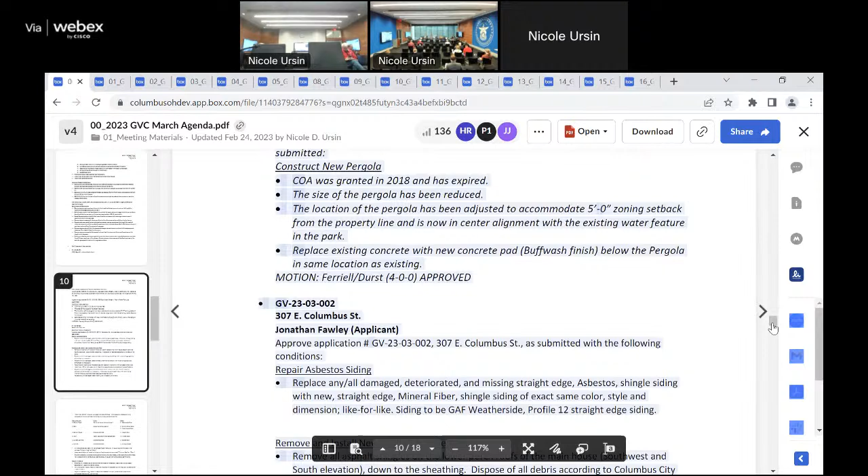Approval of the minutes from the last meeting. Do I have a motion? I move we approve the minutes from the last meeting. Thank you. Second, thank you. All those in favor say aye. Aye. All those opposed? Motion carries. Thank you.

On to applications for certificates of appropriateness. First one is item GV 2303-10, 46 East Frankfort Street. Do we have anyone for this application? Please step forward. Have a seat, thank you.

Please. I have to swear you in. Do you swear to tell the truth, the whole truth, and nothing but the truth? I do. State your name, please. Scott Doran. Thank you, sir.

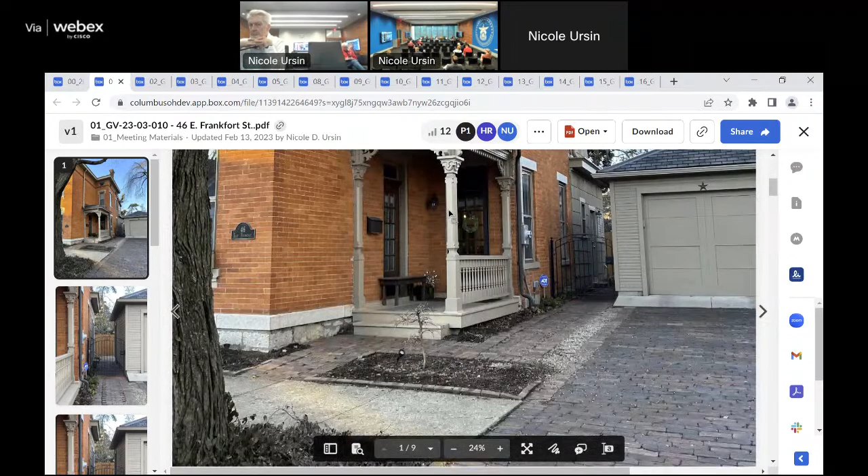This is for an exterior building alteration to install a new side door, to remove an existing full light door on the east elevation, and to install a new metal full light door, a Provia Legacy single entry door with a frame saver frame. The frame is a textured clay aluminum frame cladding. Exterior color will be sandstone, identified as number PMK 21633U in the color swatch, and the hardware is to be an antique brass finish.

Staff analysis: the applicant submitted a COA application for the proposed door replacement. The proposed replacement door is on an addition that was enclosed sometime after 1951, as it appears as an open porch in the 1951 Sanborn maps. After reviewing the file for 46 East Frankfort Street, staff found evidence that the door proposed for replacement was not the original door on the property.

Photos show a panel door on the opening sometime around 1989, where one photo is prior to the paint being removed from the masonry, and another photo is after the paint has been removed from the masonry in 1989. This existing door on the property was installed without a COA by a previous owner.

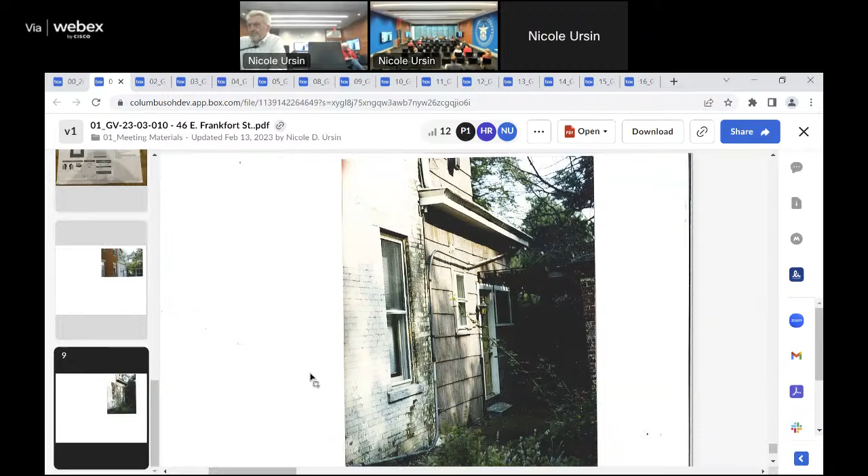Thank you. Do you have anything to add? No, I didn't know it had previously been painted, so that's a new one on me, but no, we're just trying to replace it with a consistent door. It's very dark back there, doesn't get much light in that little alleyway, and the door frame in there is essentially rotting away, so we needed to replace it with something consistent with what we had. Thank you, sir.

Comments from the commissioners? Any questions? Do I have a motion? Mr. Chairman, number 1, GV-23-03-010, 46 East Frankfort Street, to approve the application as submitted. Second. Thank you. All those in favor? Aye. Those opposed? Motion carries. Do you have a certificate, sir? I appreciate it.

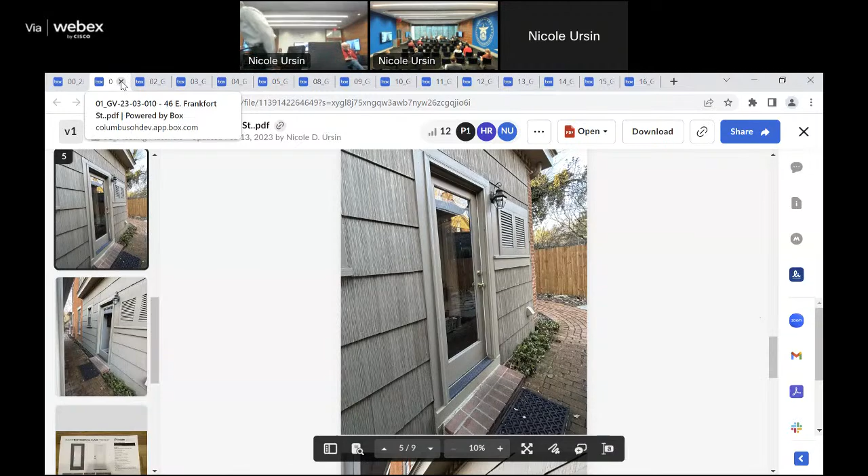Item number 2, GV 2303-11, 143 East Whittier Street.

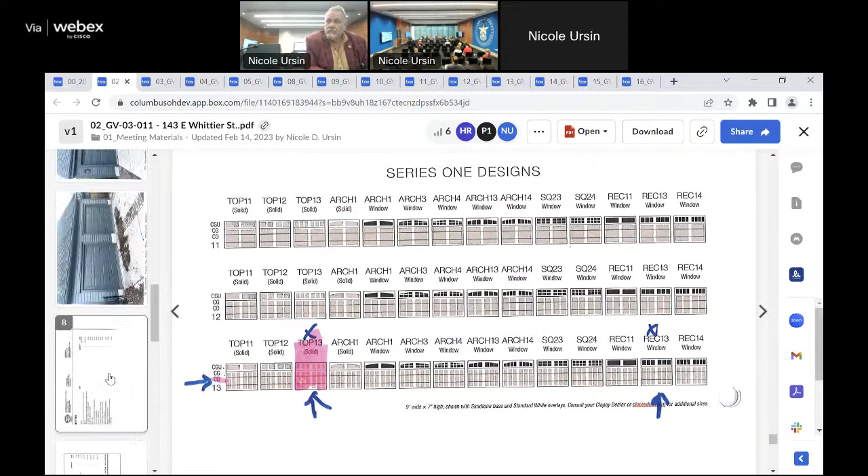The staff analysis is the applicant applied to replace the garage doors after the garage door was broken into as a result of vandalism. The existing garage is historic as the garage appears on the 1951 Sanborn map of the same location. There are COAs issued for new carriage house designs, however the existing garage and those COAs appears to be the same garage existing on the property today, so it appears to be that garage that appeared previously.

The Clopay Coachman door is currently installed at 577 Cedar Alley and 710, 714 South Fifth Street. Staff recommends approval with any and all clarification to be submitted to HPO staff for review and approval prior to issuance of a certificate. The recommended condition here is that the applicant submit the paint color to HPO staff prior to the issue of the COA. The basis for our recommendation is 311611, 9, and 10.

And for German Village guidelines, new buildings, garages, number 6. Do you have anything to add or any comments? No, just trying to get my garage door fixed from being broken into numerous times.

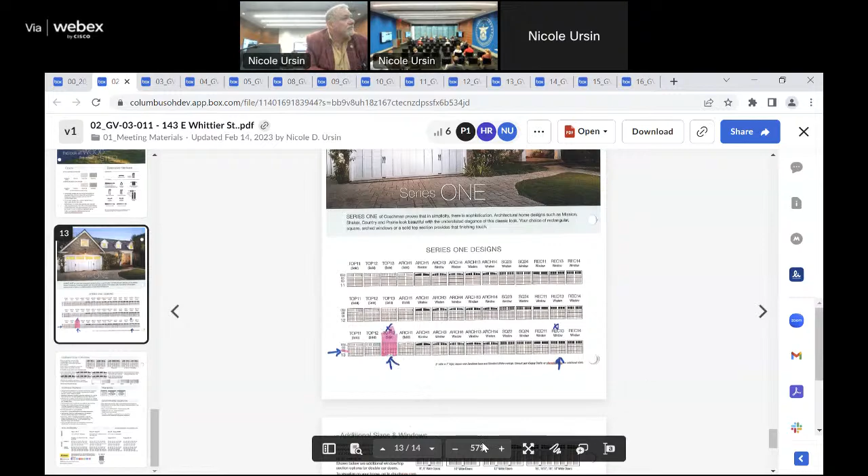Commissioners, just for clarification, did you say the garage is historic or is this a replacement garage? It's a little unclear from the record. The garage door, the garage is what shows up as the existing garage in those COAs, but there have been several COAs issued for new garages since then. So it's unclear if this is a new garage from the COA record alone.

What is the oldest record you've got for the garage? The oldest record is just from the Sanborn map in 1951 with the garage taking the same footprint as the existing garage. But the COAs date kind of a range in the 70s and 80s.

Any other comments from the commission? So in the staff report, it suggests it's a carriage house, is that right? Or is it just a garage? There were COAs issued for the carriage houses. Okay, they were never constructed. So, okay, I just want to say, if this is a carriage house, it's an appropriate one. But it's not, so I won't say that.

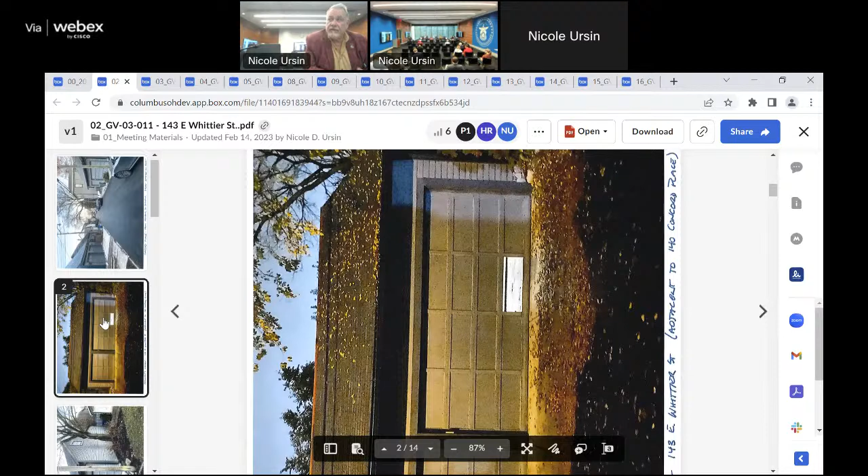It's a 3-car garage, and it's been that way since I've owned it. They did initially select a garage door that matched the others in the alley, but I was suggested that I go with a different model. So I've done that. The cost just doubled, went from $5,000 to almost $11,000 now.

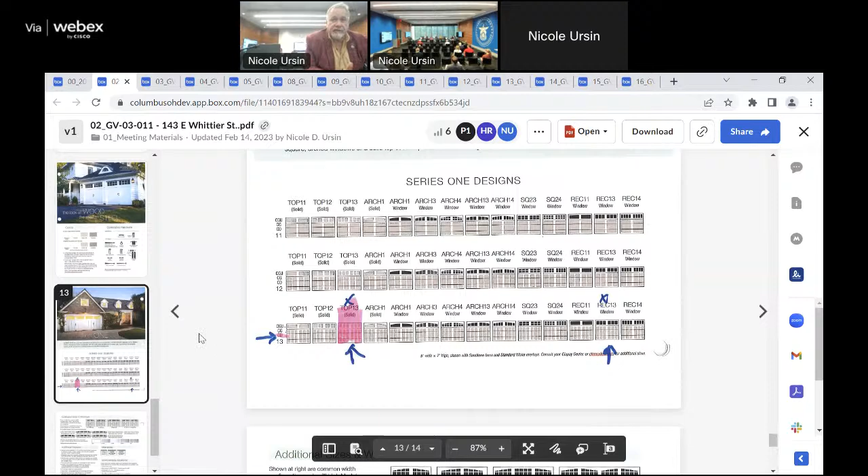Cost of steel, sorry, the cost of steel, is this steel? No, they were both steel doors. I think it was the finish. The one that was recommended has a veneer finish on it. Possible, yeah.

Any other comments from the commission? Do you have a motion? So, Mr. Chairman, agenda item 2, GV-03-011, 143 East Whittier Street. I move to approve the application as submitted. Do I have a second? Second. All those in favor? Aye. Those opposed? Motion carries. Thank you.

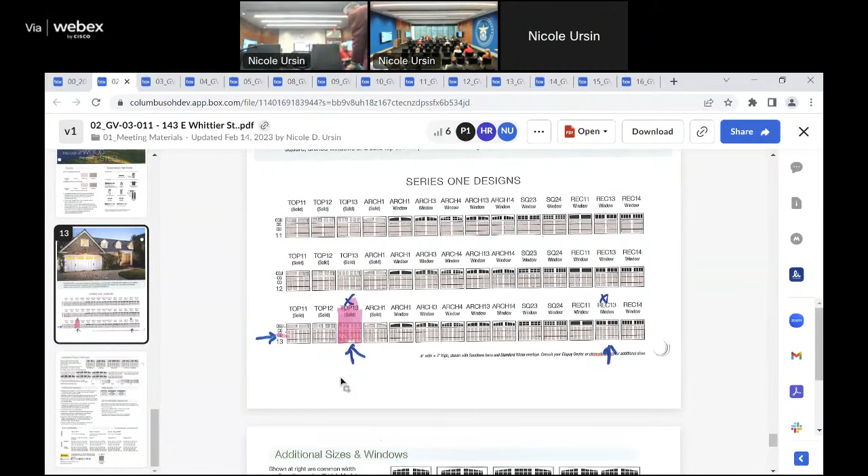Item number 3, GV 23-03-12, 600 South Lazelle Street.

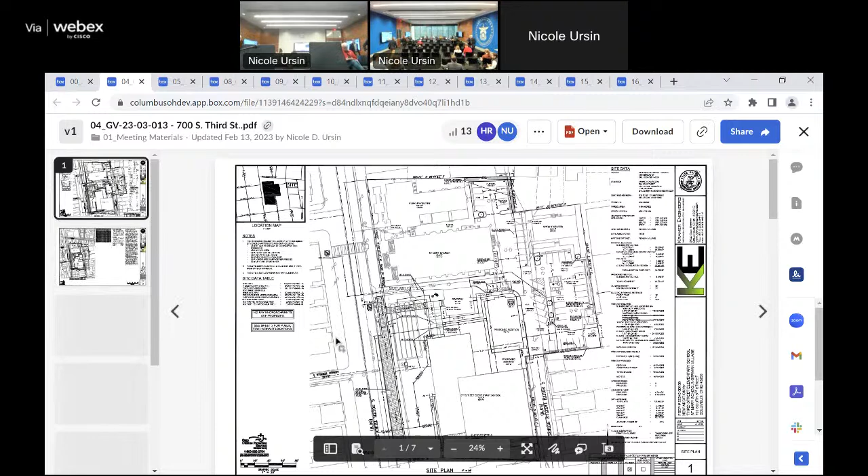Excuse myself. Only who's paying to do this project.

Raise your right hands, please. Do you swear to tell the truth, the whole truth, and nothing but the truth? I swear. State your names, please. Kevin Lee, Matthew Teisman with MKC Architects. Thank you, sir.

The proposed work description is for a revised parking layout to amend a submitted parking layout. The new layout has been reviewed and approved by the City of Columbus and variance BCA 22-134 and meets the variances presented by the commission in GV 22-05-024, which the commission recommended. It also includes the required bike racks per Columbus zoning code 3312.49.

Staff analysis: at the March Business Meeting, the Commission asked the applicant to clarify if there was a change in the number of parking spaces. The staff recommendation is approval with any and all clarifications to be submitted to HPO staff for review and approval prior to issuance of certificate, based on 3116.13 standards for site improvements A.

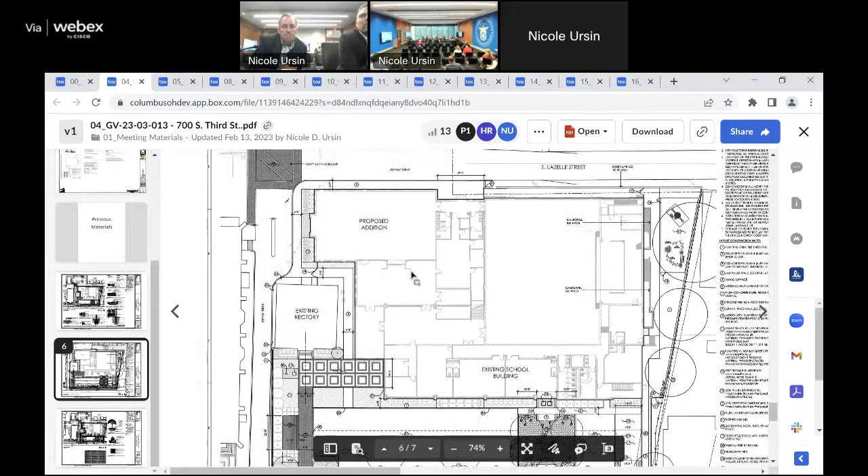So was there a change in the number of parking spaces? We heard confirmation verbally, but we didn't receive anything confirming that in writing. We sent a revised drawing indicating there are no changes to the amount of parking spaces - there has not been a change since the concept review last year.

Anything else you'd like to add or comment on? No. Commissioners? Move on application GV 23-03-013, 700 South Third Street, to approve the application as submitted since the applicant clarified there was no change to the number of parking spaces. Do I have a second? Second. All those in favor? Aye. Aye. Those opposed? Motion carries.

Thank you. Item number 5, GV 2303-014, 637 South Third Street.

With your right hand, do you promise, do you swear to tell the truth, the whole truth, and nothing but the truth? I do. State your name, please. Jonathan Barnes. Thank you, sir.

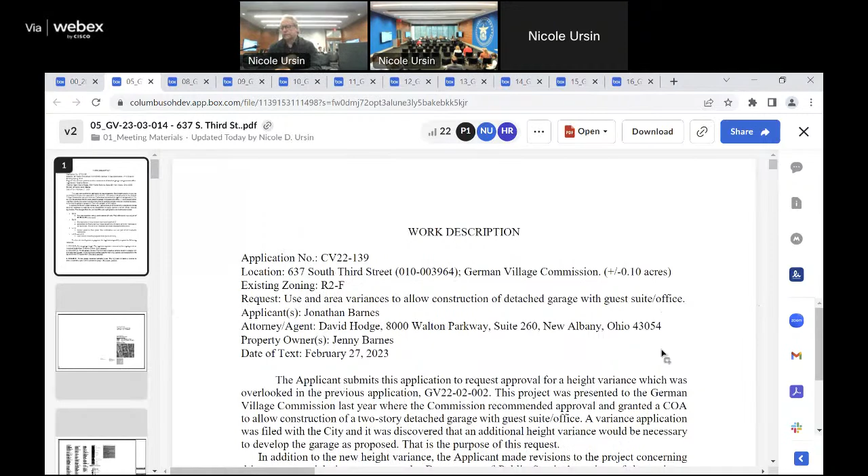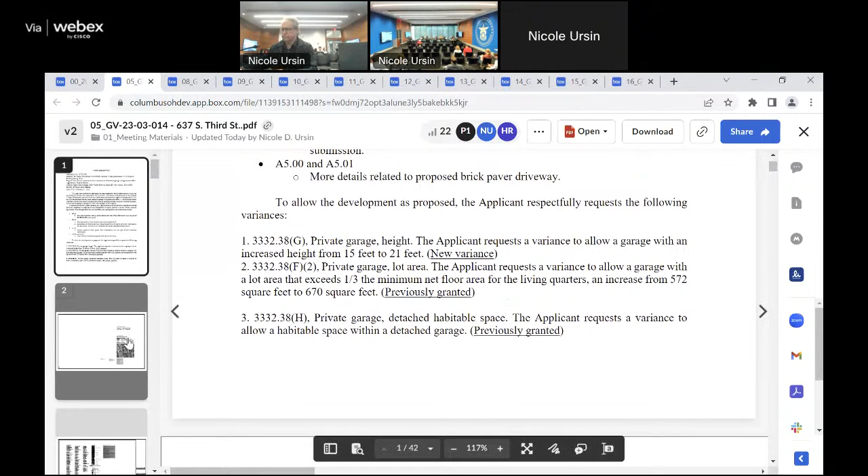This is a proposed work description for variance recommendations: 3332.38F2 for private garage lot area. The applicant requested a variance to allow a garage with a lot area that exceeds 1/3 the minimum net floor area for the living quarters, increasing from 572 square feet to 670 square feet. Also 3332.38G, private garage height - the applicant requested a variance to allow a garage with increased height from 15 feet to 21 feet.

And 3332.38H, private garage detached habitable space - the applicant requested a variance to allow a habitable space with a detached garage. This also includes a driveway material change, where the driveway design now is to be a brick paver driveway mortared on a 4-inch concrete mud slab on 4-inch gravel. The approved design was originally for a gravel drive.

Staff analysis: the applicant submitted a COA application for changed variances from their previously approved variances for a carriage house construction. The carriage house was approved as GV 21020009A and renewed as GV 22020001 on December 14th, 2021, to construct a new detached 686 square foot 2-car garage with occupied studio office space above, replacing their previously demolished outbuilding.

The variance recommended is GV 21020009B and renewed as GV 22020002 on December 15th, 2021. The following is the recommended variances from those - these are coming from those recommendations.

That's the variance recommendation for section 3332.38, which limits private garage heights to 15 feet, requesting a variance to allow height to be 17.5 feet above grade. And section 3332.38H, which will allow habitable space above the garage with reduced development standards in an R2F residential district.

The applicant currently proposes changes to the requested variance recommendations. These changes include adding 333238F2 private garage and lot area change, changing the height from 17.5 to 21 feet, and the height of the carriage house was approved as 21 feet 6 inches. The applicant also proposes a new driveway design, where the design will now be brick paver driveway rather than the approved gravel driveway.

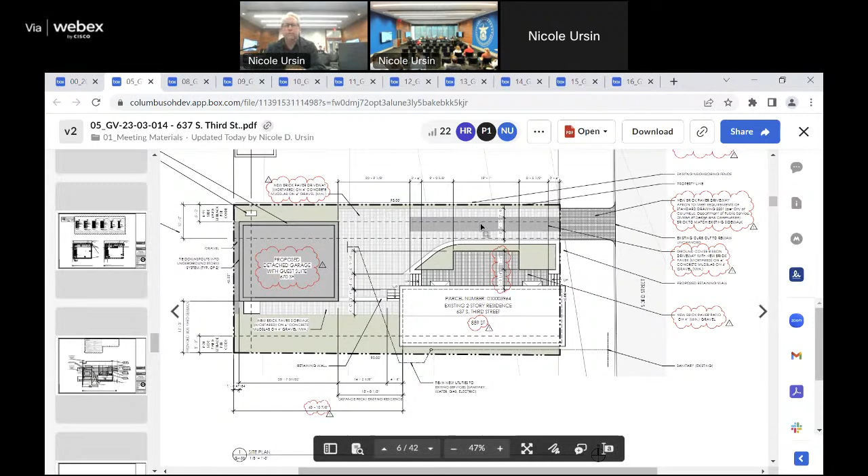Other than that, it's the same. So the pattern on the driveway through the sidewalk, is that a different pattern than the sidewalk, or is the sidewalk pattern contiguous? It's too small for me to tell, but the sidewalk's just a running bond, I'm assuming. I just want to make sure the driveway isn't a change in pattern to accentuate it. No, whatever happens on the sidewalk, we'd want to keep. Yeah, okay, that's what my concern was. Agreed. Anything else? No, that's it.

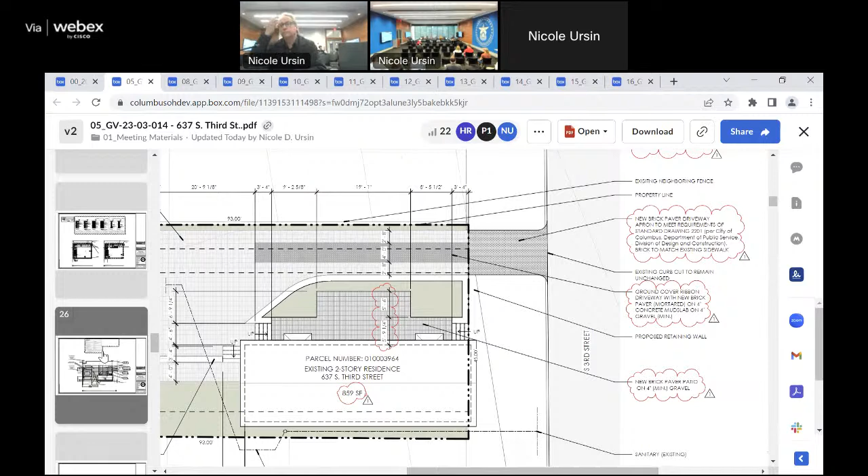Commissioners? I move on application GV 23 03 014, 637 South Third Street, to approve the application as submitted with the clarification that the only change is the driveway material change, where there is now brick on concrete on gravel and a grass divider, making it pervious. And the clarification that whatever pattern the sidewalk brick is will be matched with the driveway brick pattern, since the wording was unclear. We're recommending that the variance be granted, and that these variances just didn't get requested during design, they're just being requested now.

Do I have a second? Before that, so sorry, one part of the motion is for the variance recommendation, and the other portion is for the driveway material change. I don't know if we would like to split that, to have one just be for the variances specifically, and another for the material change. I think we can do it together, to recommend the variance and approve the driveway material change.

So I assume your motion stands that way? That's what my motion stands as. Second, that's what was intended. Sorry for interrupting. No, we're fine, thank you. All those in favor say aye. Aye. Those opposed? Your motion passes. Thank you very much. Thanks.

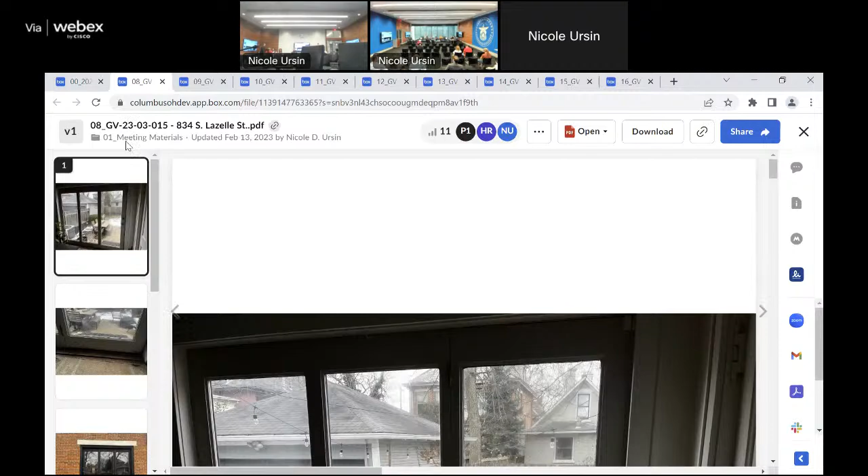On to item number 9, we'll come back to that. GV 2303-016, 792 South Third Street.

Raise your right hand, please. Do you swear to tell the truth, the whole truth, and nothing but the truth? I do. State your name, please. Douglas Brimble. Thank you, sir.

The proposed work description is new construction for a new addition, to build an addition in the rear of the home on the east elevation. The addition will be approximately 7 feet 10 inches by 15 feet 9 inches.

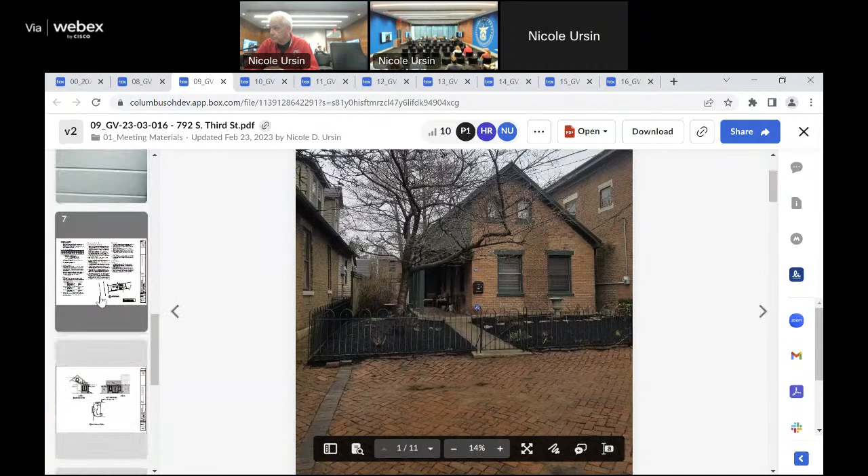Sorry, my staff report is misprinted. It's actually going to be 7 feet 4 inches by 15 feet 2 inches. The agenda has the correct measurements there.

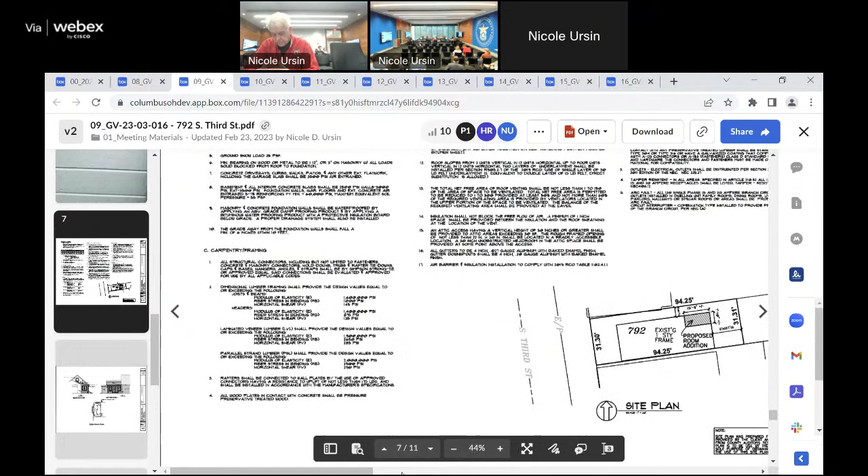Exterior paint will match the existing hunter green. All materials to match the existing addition. Doors to be multi-light Pella 2668 wood French doors. The existing windows to remain on the existing addition. Existing sliding door to be removed. Materials to be Pella Proline casement windows. Shingles will be CertainTeed Carriage House and Stone Gate Gray. The siding will be actual wood, tongue and groove, to match the existing on the wall.

Staff analysis: the applicant was present at the March business meeting and had a brief discussion with the commission on setting back the addition from the edge of the historic structure. The commission requested photos of the building and additions from further away and of the front of the house, and recommended the applicant select a window from the approved list.

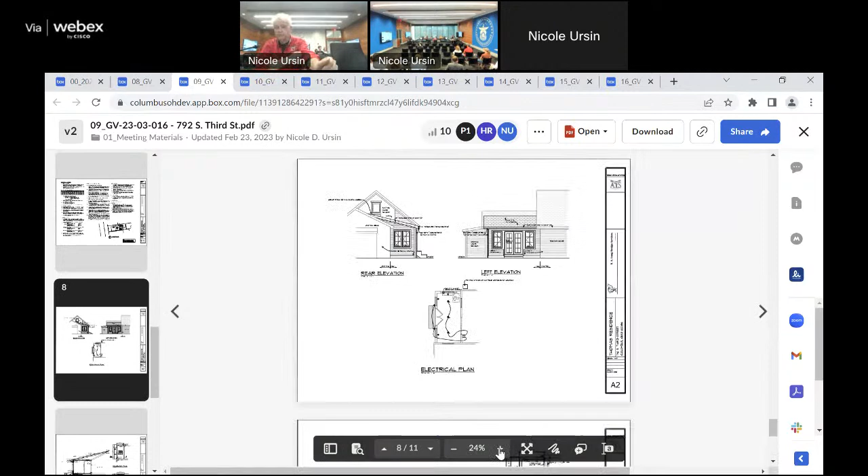The applicant has amended the design to show the addition offset from both corners by approximately 4 inches, and provided photos of the house and additions. The applicant also provided details of the materials intended: Pella Proline casement windows, CertainTeed Carriage House Stone Gate Gray shingles, and wood tongue and groove siding to match the existing home. Staff recommends the commission offer feedback and continue the application to allow time to amend the design so the addition is differentiated from the historic structure and historic additions.

The basis for the staff recommendation is code sections 3116.11, 1, 4, 9, and 10, and German Village guidelines for additions 1, 2, 3, 4, and 5.

The drawings were changed and I did send them in. Yes, they're in the packet. The applicant has amended the design to show the addition offset; that should be in the packet now.

Anything else you'd like to add or comment on? We do additions all the time, and our company philosophy is to make it appropriate for the neighborhood, to make it look like it grew there, that it belongs there. I've got several friends who live in German Village, and they're always on me every time we work in there, so I've got to make it right or I catch it.

Commissioners, is the only recommendation to make the new siding differentiated from the historic siding? Yes. It still shows matching siding - it was on the original, and it's still in the new packet: siding to match.

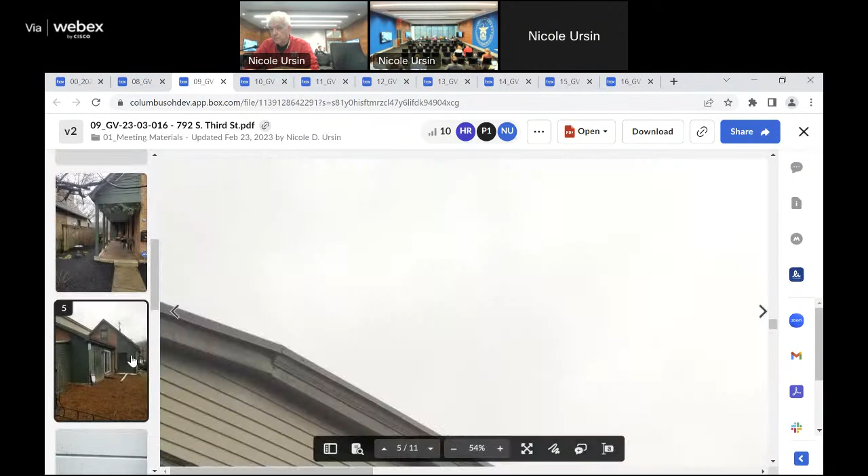Is that too big of a change to amend here? I don't think so, if he's willing to. The question is, you're matching the existing siding - your siding on the addition matches the siding on the historic structure? Yes, it's 6-inch tongue and groove, that's what's on the building. And the request is that it be differentiated, different from what's on the existing historic structure. Oh, you want it different? That's the request. We can do that.

What type of material would you prefer? The guidelines indicate we want to avoid creating a false sense of history and avoid creating the impression that it's always been this way - that's the reason to differentiate it. We could make it 4-inch tongue and groove. There are innumerable ways to differentiate it, aren't there? Oh yeah, there's a million different materials we could use. What would you prefer? That's what we can do.

What's the material on the upper part of the wall, in the gable end there? Yes, it looks like lap siding. In the gable end of the existing or the new? That's shiplap on the front of the home, on the existing historic house.

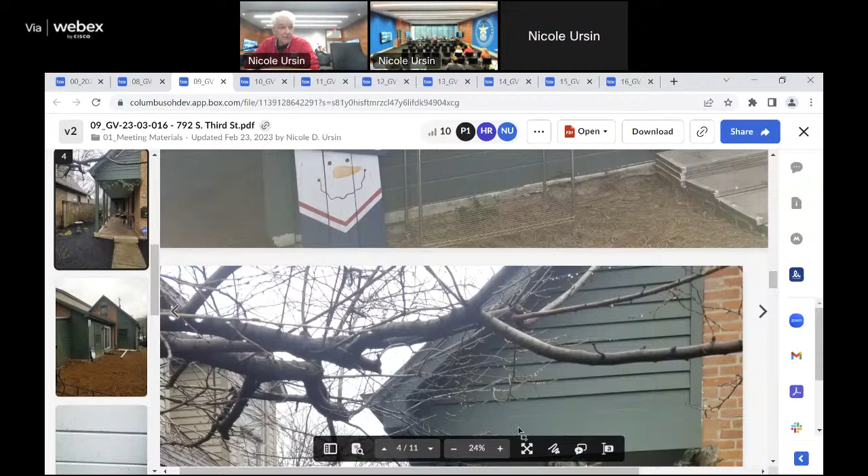Then along the rear, as you'd look at it in the other picture, at the porch and along that side and the rear of the house, it's 6-inch tongue and groove. So it's got clapboard on the side and tongue and groove on the back - yeah, it's got several different finishing materials on it. So 4-inch tongue and groove would be compatible, with all additions being tongue and groove siding.

Too similar? Sort of, I don't know. This enclosure we're covering part of is tongue and groove, and this addition at the back is clapboard. That small structure there is actually a freestanding shed, not attached to the main structure - it was existing when the homeowner moved in.

How is that accessed? To the left, from where the cursor is now. Is there a door on the outside? There's double doors there - no connection to the inside. No, it's a freestanding shed. Commissioners, any thoughts?

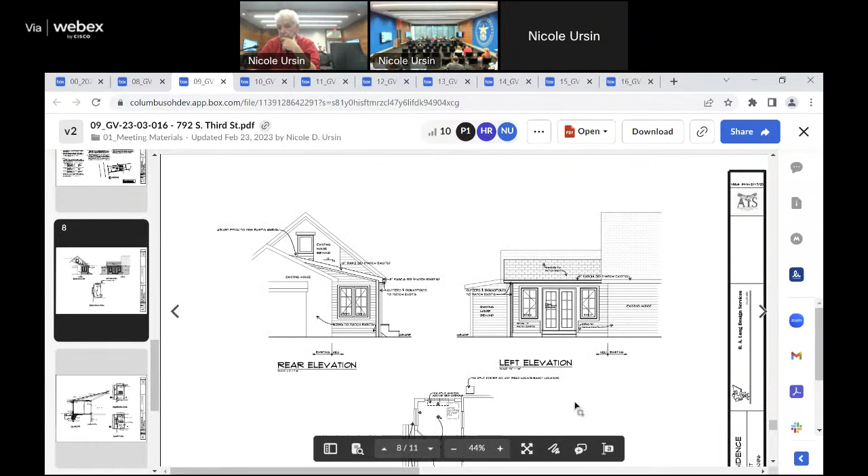Doesn't have nickel gap yet. It doesn't, that's true. Where's the tongue groove? Sufficiently different from what you see down the north side. Well, if it's all painted dark green, you're right over it. It's different, I agree.

I would say make it tongue and groove. So we're suggesting you make it the same material as the new addition on the back, not the clapboard, but the tongue and groove. Is that acceptable? Yeah, just make it a different size. No, I think we're saying the same size. You're covering up, go ahead, covering up with sufficient amount of 6 inch.

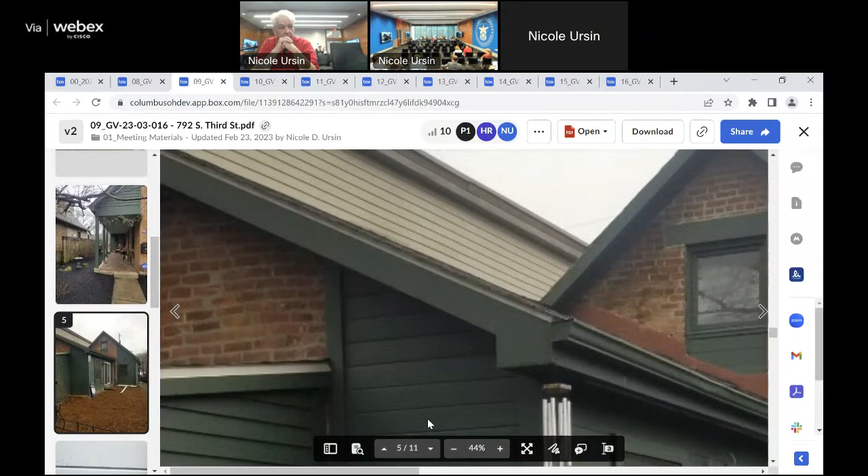If somebody else has got some other thoughts, I'm totally open. Yeah, I was thinking that too, that it's completely covering up. Almost all of it anyway, yeah. That little bit left, I'd say just go ahead with that.

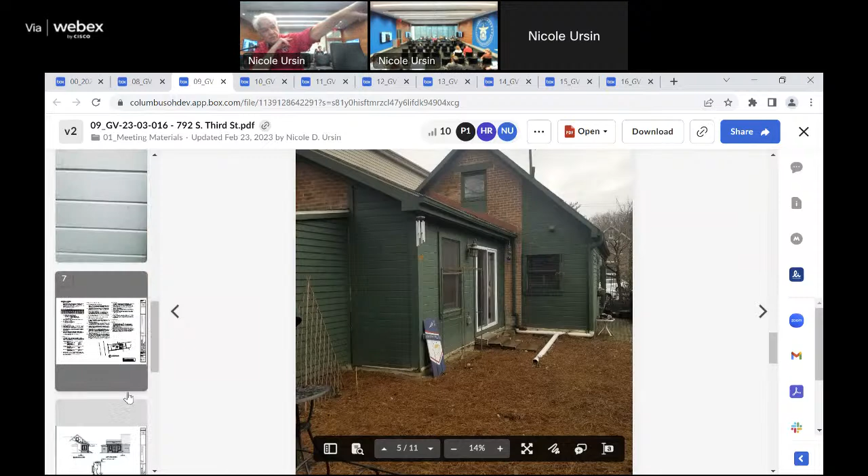And that is an addition, by the way. That part of the building, the historical building, is where the taller wall is. And then back here where the sliding doors are, that's actually an addition that was put on. It's been a while, but it is an addition.

Or just be tongue and groove. I would say either way, once it's painted dark green, no one's gonna see it. Okay. But if the color changes. Okay, is that acceptable to you, sir? Yes. Do I have a motion?

I move on GV 23 03 016, 792 South Third Street, to approve the application as amended by the applicant to change the exterior wall material from a 6-inch tongue and groove that matches the historic siding to a 4-inch tongue and groove siding. Do I have a second? Second. All those in favor? Aye. Those opposed? Motion carries.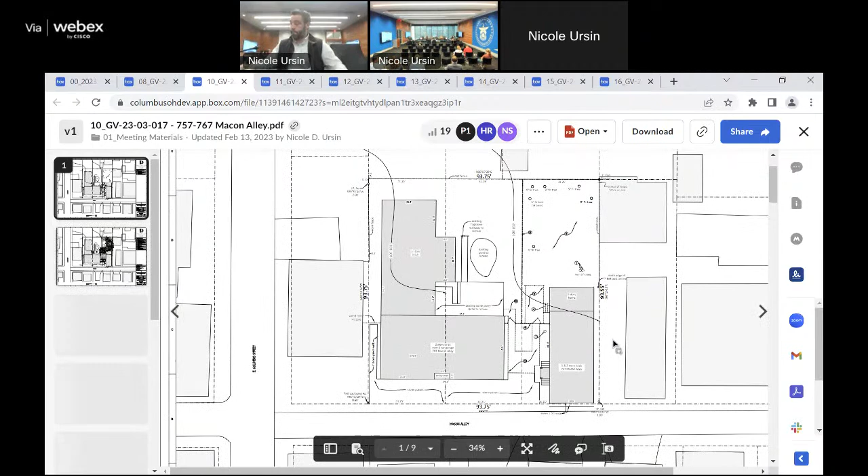The proposed work description is hardscaping for a pool to install a new in-ground fiberglass pool that's 10 feet 6 inches by 14 feet 6 inches with a 24-inch tall landscape wall with built-in water feature. The pool coping is to be Indiana limestone, and the pool equipment is to have a 5-foot 6-inch tall wood fence and gate to match existing fence that'll be installed on a concrete slab. There's an installation of a 24 kilowatt generator on a concrete slab along the west property line. And there'll be Indiana limestone pavers, ashlar pattern, at pool deck and patio. The landscaping is to plant emerald green arborvitae and occidentalis smaragd as shown along the fence line.

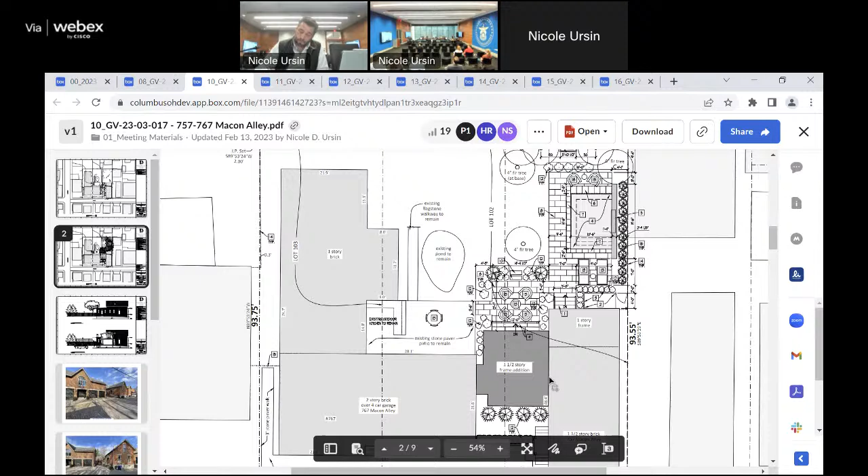Staff analysis: a connector between the two properties was approved in August of 2022 but has not yet been constructed. At the March business meeting, the commission did not have any request for additional information or feedback at that time. Staff recommends approval, with any and all clarifications to be submitted to HPO staff for review and approval prior to issuance of certificate, with the following condition: that product sheets for pavers, plants, or photos of plants and pool be submitted to HPO staff for review. The basis for the staff recommendation is 311611, 1, 9, and 10, 311613, A, and it's somewhat compliant with the German Village guidelines for site lighting, street furniture, pools, fountains, and gazebos, section 6.

Anything to add or comment? I don't think so. I think you covered it, but I'm happy to answer any questions if you guys have any.

My only question or concern is that the generator's in compliance with the city's code restrictions on noise. Yeah, it is, for spacing and for placement. Just bringing it up. But we can confirm that if we want to with staff. Yeah, if you would. Sure, just confirm that it is. That way we can say that we did our due diligence and asked the question. Do whatever I can. Anything else? Do we have a motion?

As far as I can tell, nobody really can see this pool. No, it's fenced in, yeah. I think they want to get it in before the addition's built, but that's my wild guess.

Item number GV 2303-017, 757-767 Macon Alley. I move to approve as submitted. Do I have a second? Second. All those in favor? Aye. All those opposed? Motion carries.

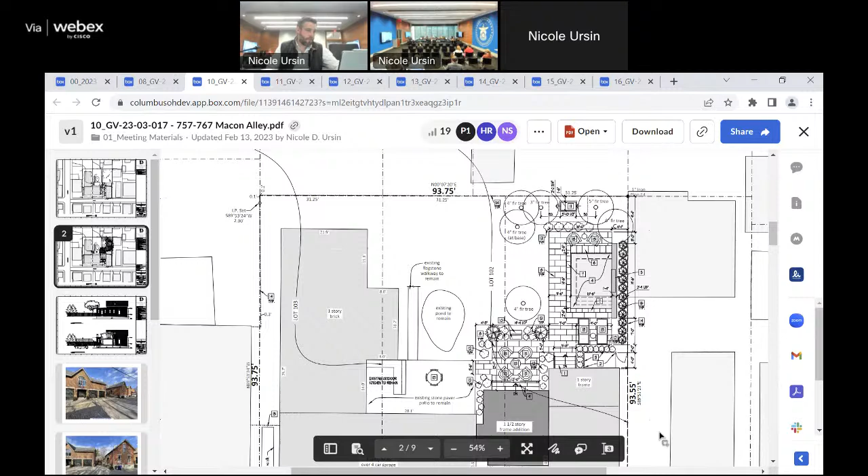The proposed work description is for an exterior building alteration for window replacement, gutter changes, and paint. To remove a kitchen window on the east elevation of an addition, it's a small 2/2 window. Replace the kitchen window with a single 4-light Marvin Ultimate French door. Retain the stone header and opening within the wall. Color to be iron ore.

Also to remove 2 living room windows on the east elevation addition. They are 2 large 2/2 windows, and remove the stone sill and stone lintel. Remove brick below and between windows. And replace those 2 living room windows with double pocketing sliding doors, the doors are to be Marvin Ultimate with grills, and the colors to be iron ore. There's also to install a new lintel and sill and the new door opening to match existing.

Remove aluminum half-round gutters and replace with 6-inch copper half-round gutters and 4-inch copper downspouts. Paint existing windows, sashes, and doors SW 7069 iron ore. Relocate an AC condenser per submitted drawings, with the AC condenser to have a new concrete slab. Remove basement window and window well and fill in the opening with CMU block. And install limestone steps for the new door openings.

For the staff analysis, after the application was received, staff recommended the applicant reconsider the application as to not widen any existing openings per the German Village guidelines. Applicant then emphasized the proposed changes were on a non-historic addition, that they wanted to move forward with their application. The non-historic addition where all of the changes are proposed was issued a COA in 1992.

At the March business meeting, the commission asked the applicant to provide any information on the original date of the home, to provide more context, photos of the overall property, and to ensure the location of the AC condenser was allowable that close to the property line.

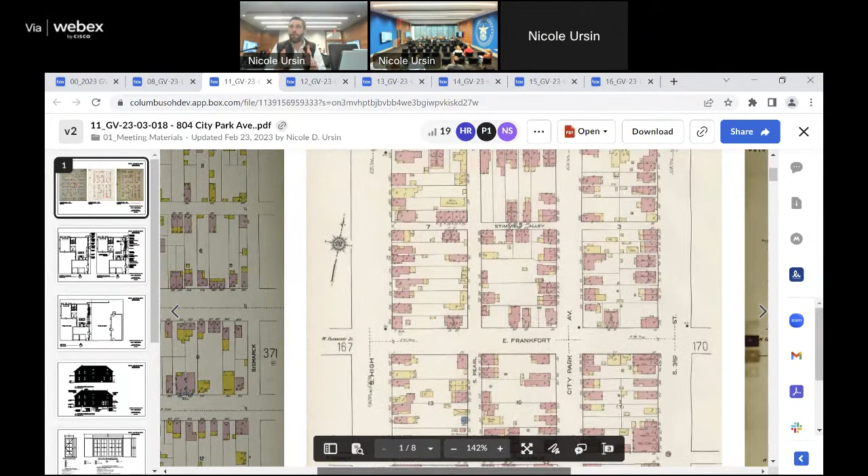Comments or additional information? Yeah, this is somewhat recent past construction from the Sanborn maps. We were able to identify the previous structure on this lot, which was a wood structure that I think went up to 1955. Different location, different shape. Even the front of this structure along City Park has a split block foundation. It was probably done about the same time, although I couldn't find 2 separate applications for that structure.

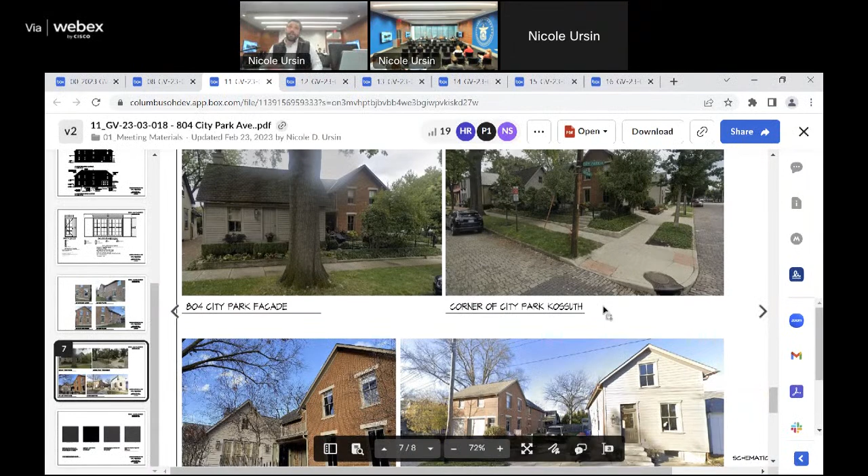And so we tried to update staff with as much history as we could from the Sanborn maps. And we understand the screening and spacing for that condenser, certainly. I think it was there. It's there now. Further on the interior of the site, and we're proposing to move it because of the new opening.

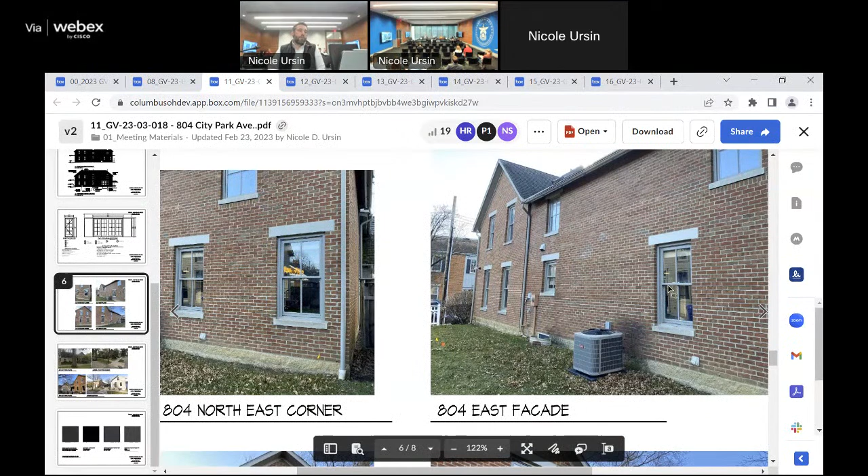I don't know if it was put there without any review. But one thing that we did want to point out was the owner does own both of these parcels. And so the screening, we would certainly want to screen it from Kossuth and Wood. There's a landscape plan coming for that, and it can be perhaps conditional on that landscape plan's approval. But yeah, we're just proposing to make those new openings for the new owner's plan for the property.

Has had good luck with their copper downspouts? Currently not copper, okay, so wants to. My experience with copper downspouts is installing copper downspouts is exactly the same as putting $100 bills on your front porch, they disappear sometimes. Yes, certainly understand that. That was an agenda item at one of our previous meetings. Yeah, I was thinking, oh gosh, maybe this feature of life in German Village has disappeared, but no. Yeah, it was a thoughtful question, though.

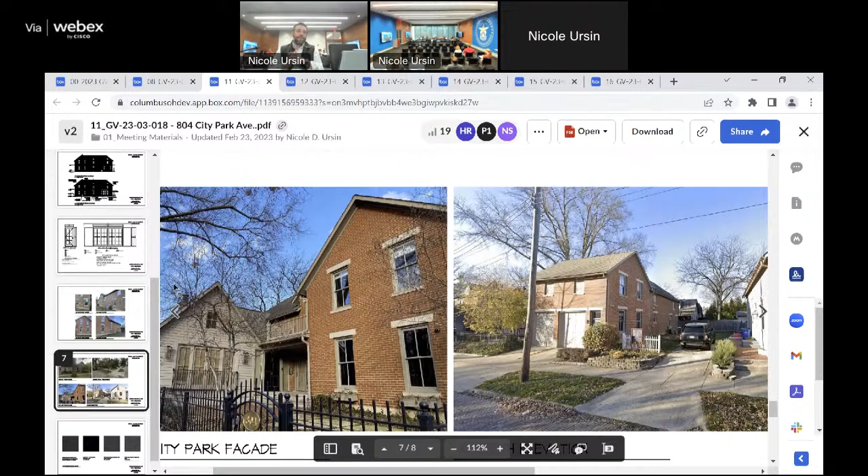Thank you. Sir, is there any potential for putting the condenser on the north side of the property? The furnace itself is just underneath the kitchen. And with the forthcoming landscape plan, that location was preferred from a distance standpoint, with a finished basement in there, and also with the layout that they're working on for the landscape.

So that's where, I guess, an assessment of the yard and where the openings were - that's the preferred location. On the north side, currently, from the information we have, we didn't get an updated survey because there's not really anything happening up there. We're not coming up against the boundary. Since he owns both properties, the dividing line between the two properties wasn't so important to them, north and south. But the driveway on the north side of the neighbor is right up to the house.

So there's some classic overlap happening there. The neighbors probably claimed a little bit of that - not enough room, considering the driveway, for the condenser to sit on this.

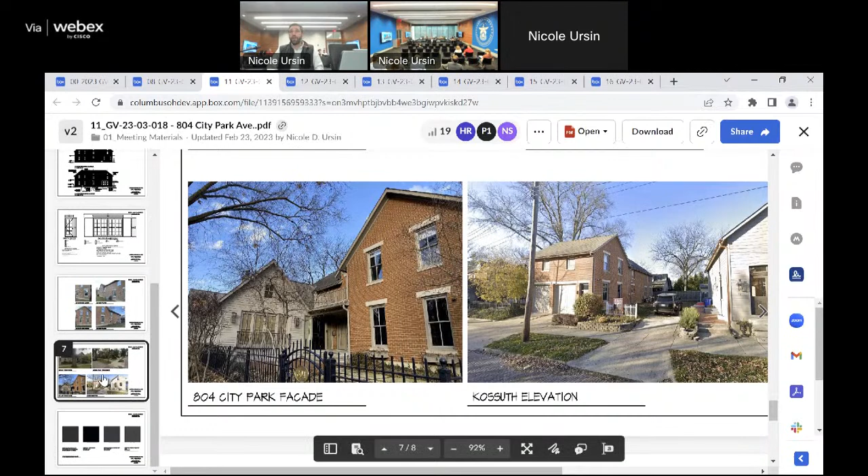I would still rather see it back from the side street as much as possible. If it got relocated north of the two pairs of windows there that are into the garage, if it was located in that next section of wall, which would be to the right on the elevation, in between the new door proposed for the French door to the kitchen and the first window of the garage. I'm just saying even that back corner of the garage, you know what I'm saying? That is back on the garage.

Oh, I see. Yeah, I think it would be the distance for the line set that we need to consider, and the efficiency. My experience would say you'll be fine with the line set.

If not, you just move it right next to the steps to the new door. Trying to avoid that, I get that, but yeah, I just want to see it off the street as far as possible.

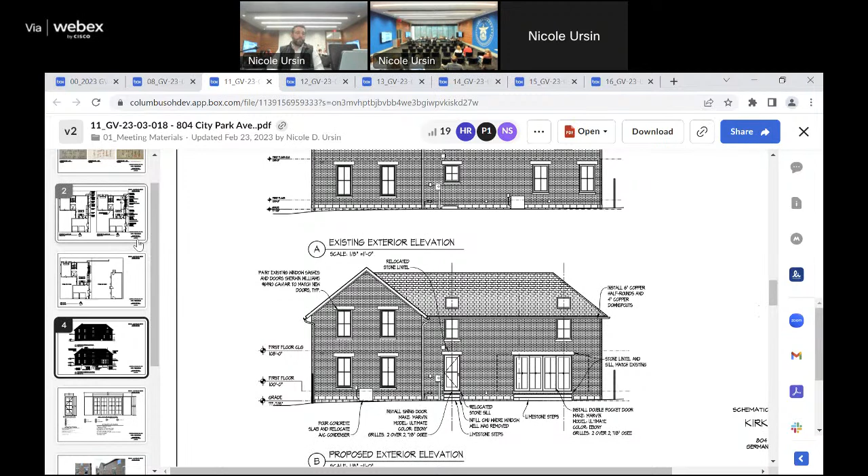Okay, commissioners, anything else? Any other comments? Do I have a motion?

I move on application GV 23-03-018, 804 City Park Avenue, to approve the application as amended by the applicant, that the condenser unit will be moved to the rear corner by the garage, and that the future landscape screening plan that is coming may choose to relocate that condensing unit somewhere else. Do I have a second?

Second. All those in favor? Aye. All those opposed? Motion's carried. Thank you, guys.

Do we have - okay, go ahead. I was going to go back to number 8, but okay, well, sorry. No, that's all right. Now, do we have number 8 here, who is 834 South Lazelle? Very good. We will move on to the next one.

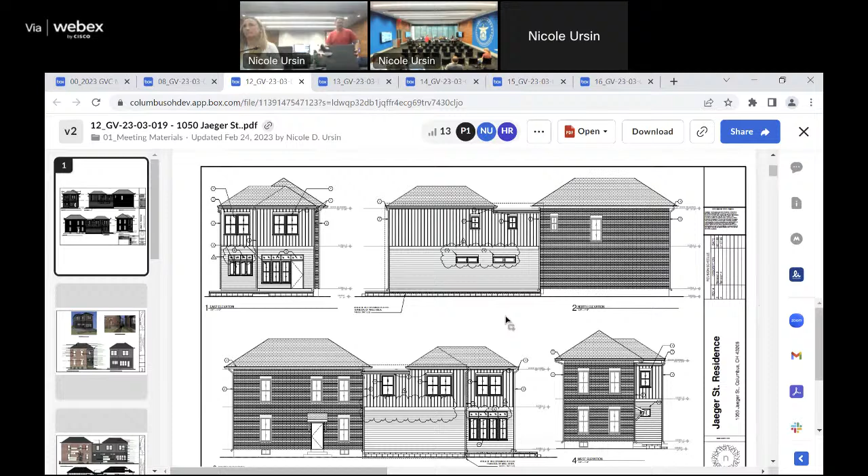Number 12, which is GV 2303-019, 1050 Jaeger Street. Raise your right hand, please. Do you solemnly swear to tell the truth, the whole truth, and nothing but the truth? I do. I do. And state your names, please. Josh Green. Elena Green. Thank you very much.

The staff analysis: staff requested additional information prior to the business meeting, and at the business meeting, the commission asked staff to edit the materials packet to have the previously approved drawings next to the proposed drawings. The applicant has clarified that while there are more details in the newly submitted drawings, the applicant is proposing no additional changes beyond the windows. Staff recommends continuing the application to allow the applicant time to amend the design with fewer changes to the window openings, based on Section 3116.12, standards for new construction, A, D, E, and K.

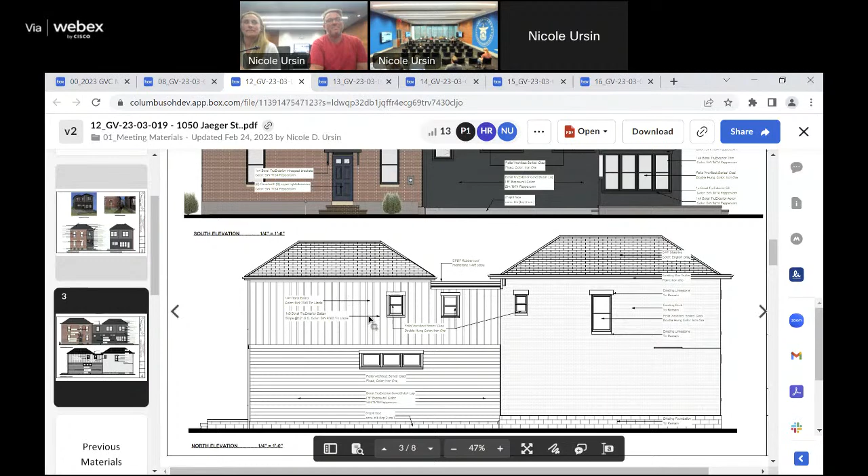So it's just a couple of additions and subtractions, adding the transoms in the new section. We took this project over, and sometimes what applies in the design stage doesn't apply well to the build stage, so some of the windows on the neighborhood side needed to be removed to make room for mechanicals and such.

Just making sure I understand what's going on. Essentially just in that elevation, lower right-hand side, right? Yeah, so originally on that side, where the bubble is, there used to be a single casement window and 2 transom windows. We removed all of that wraparound window section completely.

And then in that view, that 4-panel window gets a transom above it, so everything would line up. This is on the new addition, correct. The street side that faces the park isn't changing at all, and the original structure is not changing at all, just the windows.

Sure, any comments, questions, staff? Did we verify if they were 2/2 or still going to be 1/1? We did clarify that. They're still 1/1. The architect had them as 2/2.

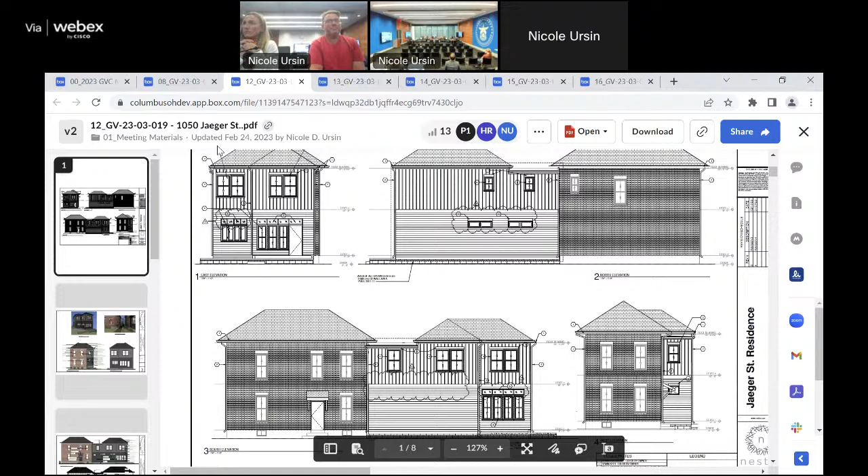Thank you, awesome, thank you, have a good evening. I'll send that as soon as we leave here. So you have it, yeah, thank you. No worries, if I don't do it now I forget. Thank you, have a great night.

We'll wait for our fifth commissioner to seat himself. Oh, I didn't even know. Sorry, I'm late.

Item number 13, GV 2303-020, 275 East Whittier Street. Please raise your right hand. Do you swear to tell the truth, the whole truth, and nothing but the truth? I do. State your name, please. John Stevenson, attorney for the owner. Staff?

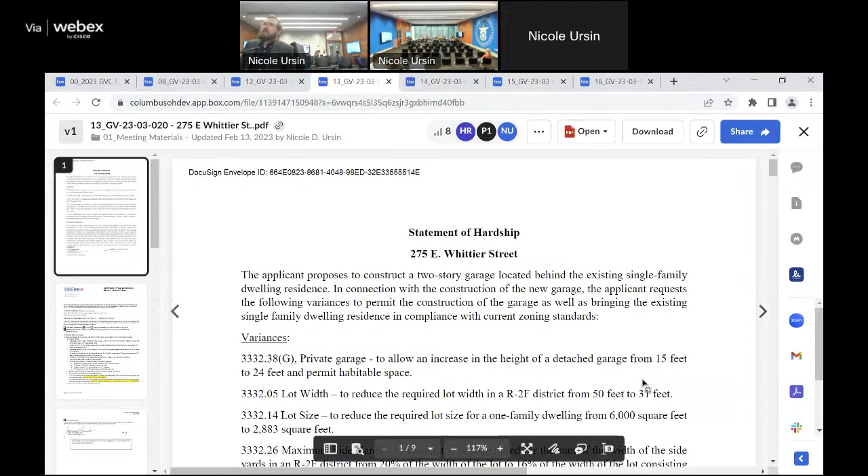The proposed work description is for variance recommendations. The garage design was previously approved in March of 2022 as GV 22-01-006. This is 3332.38G, private garage, to allow an increase in the height of a detached garage from 15 feet to 24 feet and permit habitable space.

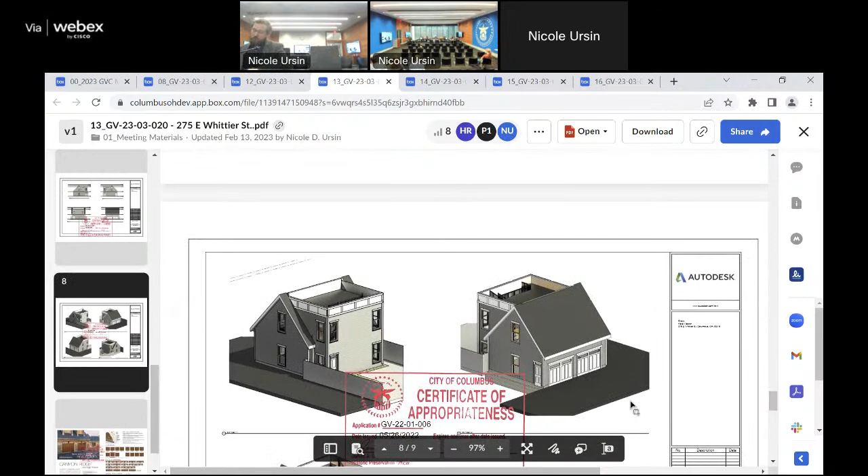3332.05, lot width, to reduce the required lot width in an R2F district from 50 feet to 31 feet. 3332.14, lot size, to reduce the required lot size for one family dwelling from 6,000 square feet to 2,883 square feet.

3332.26, maximum side yards, to reduce the ratio required for the sum of the width of the side yards in an R2F district from 20% of the lot width to 16% of the width of the lot, consisting of a 1 foot 11-inch side yard and a 3 foot 1-inch side yard in connection with the construction of the garage.

3332.26, minimum side yards, to reduce the minimum side yard required for one family dwelling in an R2F district on a lot less than 40 feet wide from 3 feet to 1 foot 11 inches in connection with the construction of the garage. At the March business meeting, the commission asked the applicant to provide which variances are existing and which are caused by the garage, and to clarify if there are any changes to the proposed design. The applicant has clarified that there are no changes to the design.

For 3332.38G, the variance is for new construction. For 3332.05, lot width, this is an existing condition of the lot. For 3332.14, lot size, this is also an existing condition of the lot.

3332.26, maximum side yards. This variance is required for the construction of the garage. However, the existing structure would also require a variance that may be slightly less than the one requested.

And 3332.26, minimum side yards. This variance is required for the construction of the garage. However, the existing structure would also require a variance that might be slightly less than the one requested.

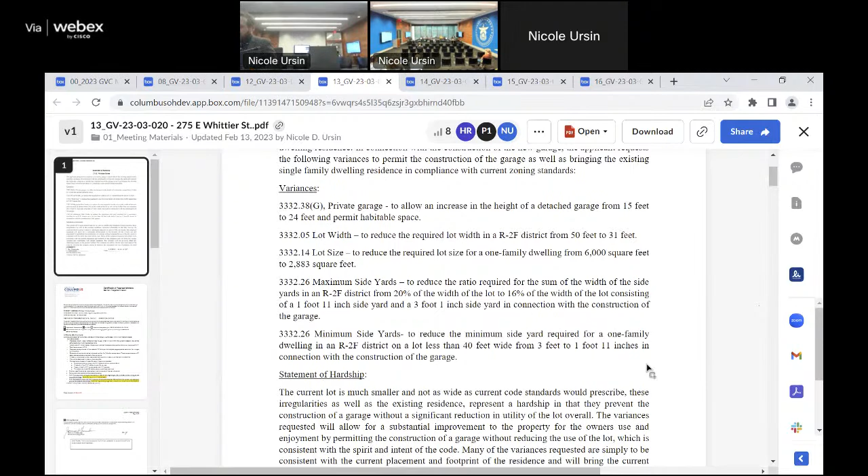Hang on a minute. You remember whether you voted just now? No, I can't remember whether I voted. Yeah, I thought you just voted for the verification. No, because I didn't think I voted for the original design either.

Okay, for sure. At the last, or at the hearing that was approved, we had 4 commissioners at the time. Commissioner Thiell, who recused, and Commissioner Foley McCoy seconded, or who made the motion and seconded the motion. So I cannot recall who was all there at the hearing. I know Anthony was there. And I think Anthony might have been this vote.

Probably, it's possible. Well, you don't have to vote no now because you voted no last time, but that would be the consistent thing to do. But it would help if you remembered. Yeah, and I would have to dig through my files to see.

What it was. We only had 4 at the time, so Commissioner Durst, you may not have been there for that final review. What's the date of that final review? So do we take the vote again?

If we would like, just to. So let's take the vote. So I think, well, did we vote? Was our vote recorded? It was recorded. I said it doesn't... I said it passed, yeah, because I thought, I mean, yeah, there, so could be the continuations as well, possibly.

So someone who voted affirmatively could move to reconsider. Voted in favor of? Well, someone who was in the majority who wished could. So not Karen. Yeah, we weren't in the majority.

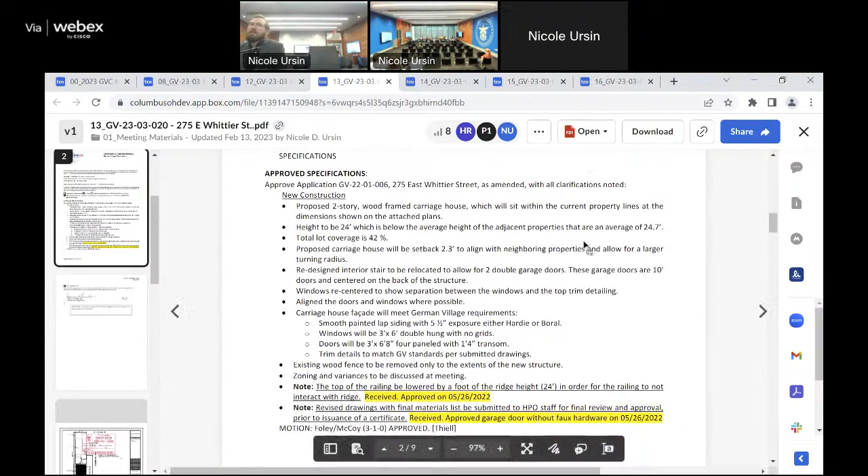Made a lot of concessions, that's why I was asking what was the date of the final vote. So if you had foreseen this eventuality, you might have moved to have us continue it, but... That's right, voted. Yes, yeah. Or ask for more discussion.

But now we've voted, so it doesn't pass. So can we? Well, it's not recommended at the time. Right, not recommended. All we do is recommend. Yeah, so we don't, the city could still say you're good here.

And there's no other option for us to reconsider the vote? Being among those who prevailed, I'm not interested in exploring creative avenues for you to change the results of the vote. There may exist, none occur to me at the moment. And Karen and I can't. You were the... All right, so I move to reconsider.

Does it have to be one of the... maybe, I would imagine not. So do I have a second? I will second. All right, and we have to vote on the motion to reconsider.

All those in favor of reconsidering, say aye. Aye. Opposed? Motion carries to reconsider.

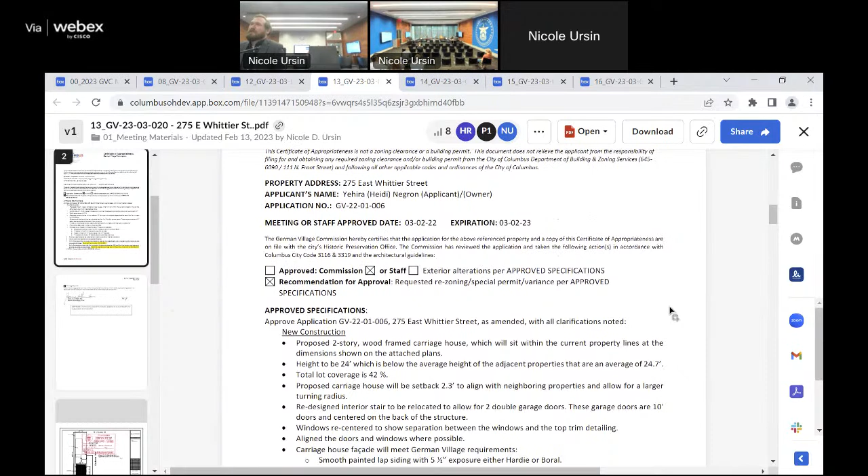That's still your opinion, for sure. My opinion is I disagree with the design wholeheartedly. I think it's a violation of the guidelines, et cetera, but that ship has sailed.

So rather than me taking a stand and voting against the zoning request, I will vote to approve it, to recommend it. So you are truly changing it, yes. I understand your position. My position is that we need to move ahead on this because the design is approved.

So they need to move ahead. As much as I resent it and don't like it, I'm not going to stand in your way. That ship has sailed. Well, I appreciate that from the commissioner, because I think that's a fair thing to do.

So all those in favor of recommending the vote to recommend the zoning, say aye. Make a motion first, right? Sorry, motion to recommend. Is there a second? Second. All those in favor of approving the recommendation, say aye. Aye. Those opposed?

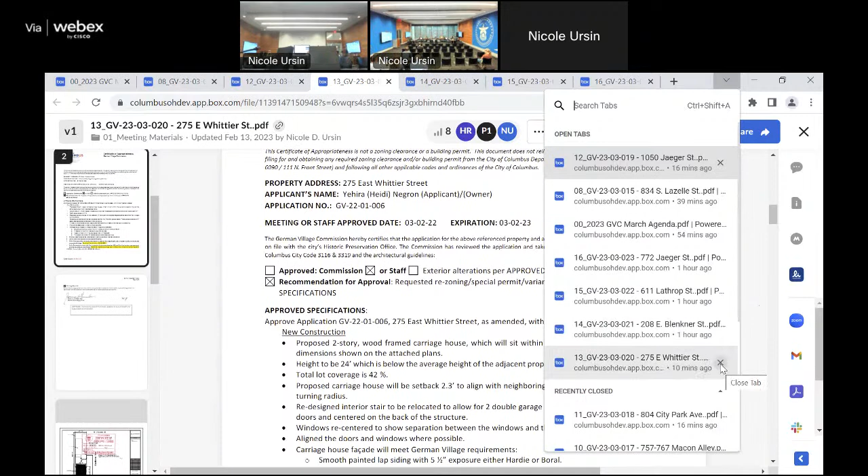It passes. Thank you. Good things every day. I'm unfair? No, well, I didn't say that. No, he said it would be fair to approve it. Oh no, I didn't say that. By implication, well, in my opinion. I understand. It goes without saying, it's a matter of opinion. We're talking about fairness. I don't think you're unfair, I think that's a bad opinion, I see, if I'm correct. I understand. Because I do not understand.

Let's move on. Thank you.

Item 14, 208 East Blenkner Street, GV-23-03-021. Raise your right hands please. Do you swear to tell the truth, the whole truth, and nothing but the truth? I do. State your names please. CJ Andrews, Mode Architects. Joseph Wenger. Thank you.

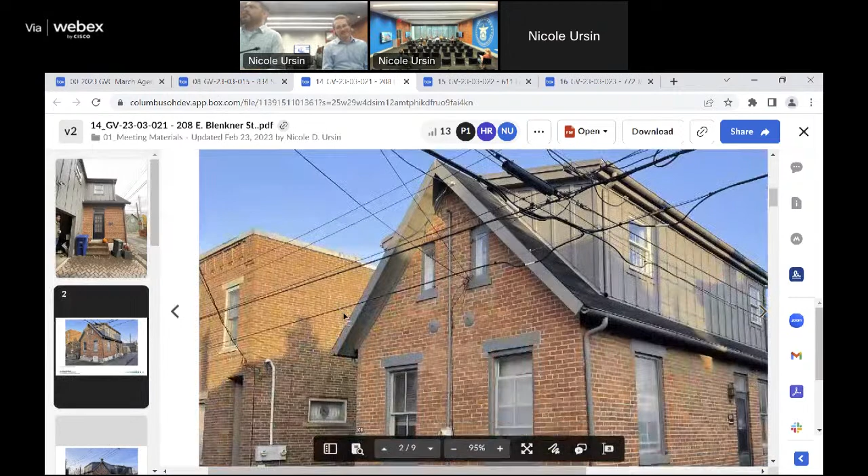This is the proposed work description for an exterior building alteration for a window opening and storm door removal. It's to open a previously infilled masonry opening on the north facade and place a Marvin Ultimate wood double hung window with simulated divided light to match the 2/2 windows of the existing house, to remove a non-contributing storm door from the east elevation along Macon Alley, and remove the concrete stoop with the limestone door sill to remain.

Staff analysis: at the March business meeting, the commission commented on the removal of the steps from the alley door and suggested the size of the window opening would need further discussion at the hearing. The commission also requested a photo of the property showing the other entrance door, which has been provided.

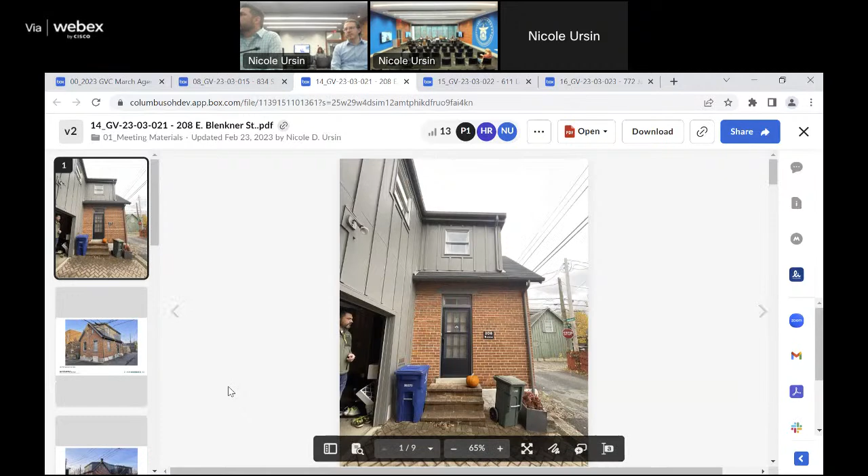Staff recommends approval, with any and all clarification to be submitted to HPO staff for review and approval prior to issuance of the certificate, with the following conditions: that the stair be retained along Macon Alley to follow German Village guidelines, and that the new window be made the same size as the historic opening, as indicated by the brick pattern. The basis for the staff recommendation is 3116.11, Standards for Alteration 2, 3, and 5, and the German Village Guidelines for Entrances and Doors 7, and the German Village Guidelines for Windows 6.

Thank you, any comments? In regards to the window size, we have chosen the size in our submission. There's going to be a kitchen on the other side of that window, and this will be a window above the sink, so we have a countertop to contend with on the inside. Understandably this isn't fully the commission's concern, but that's where we're coming from concerning the window and the height we've chosen. The width does match the historical opening, it's just a matter of where the sill is.

I believe it was actually a door at one point in time. You can tell the bottom of that, and it's very long. This house is full of doors. You think it was a stoop there? You can see where the infill kind of goes down. I think you can see where the sill extended. Oh, I do see that. I apologize.

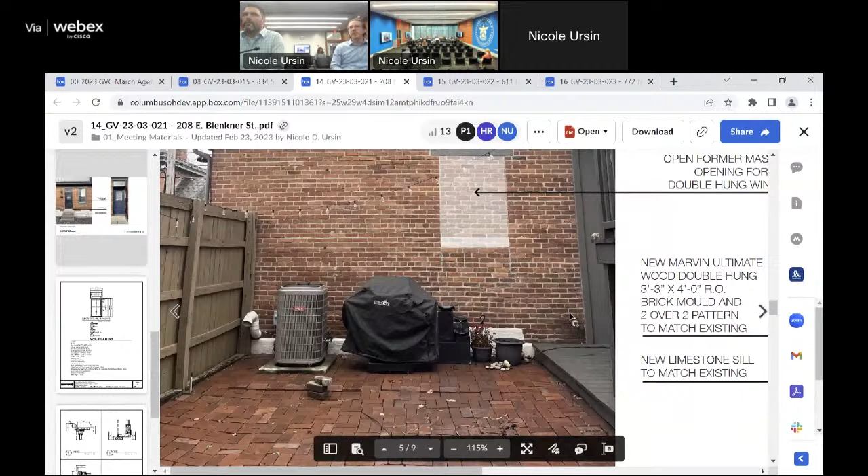Comments from the commission? I want to transition to the stoop, unless there's specific questions about the window.

You have the floor right now. The rationale behind removing the stoop is that this is a zero lot line structure, and the stoop is entirely in the alley. It's been contacted with vehicles in the past, and the owner's asking for it to be removed. Understandably, the commission's intent is that the stoop remains. There could be potential resolution with some sort of ghosting element there to mimic that it was there. Our preference is to maintain the limestone sill only, just to stay out of the alley.

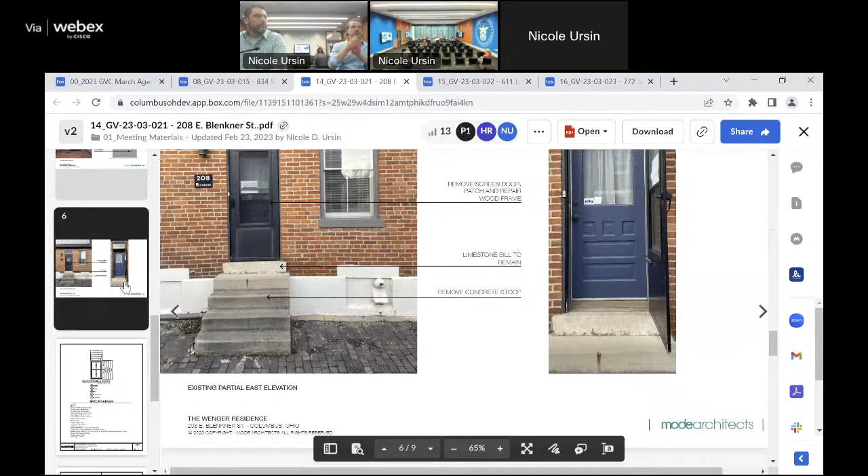That's concrete, or is it? Yes. And this house on the side, it's been hit before. People drive very fast on this alley, so my concern is the safety one, that the house itself is actually a half inch in the alley. This stoop is fully in the alley. You can see it best in these two photos.

And the entrance is on the other side of the house. Correct. Anything else to add? No. Commissioners?

Have you explored the idea of doing a window that matches the height and then doing a panel that's opaque at the bottom, so you wouldn't have the view but would still get light in the kitchen and maintain the existing opening? We've thought about that. The concern is how low the sill gets inside that kitchen.

We did this on Jim Nichols' house actually, we do it all the time. We did a door, and what we did is almost like a Dutch door. We did a half panel on the bottom half, and then a window above, so you can still build the counter height wherever you want, but it maintains the historic opening, something like that. So it looks like a door from the outside, but this would be a window.

A window with maybe an opaque panel. Not even opaque panels necessarily. The house on the corner of Macon and Beck, the way it was treated, it's clear glass, but it's got the backsplash built in. Got it. And you can see the backsplash set off the back window, they've got that gap.

Does the sill look like it's gone? Put back in, it can be kind of fun actually, and interesting. Exactly.

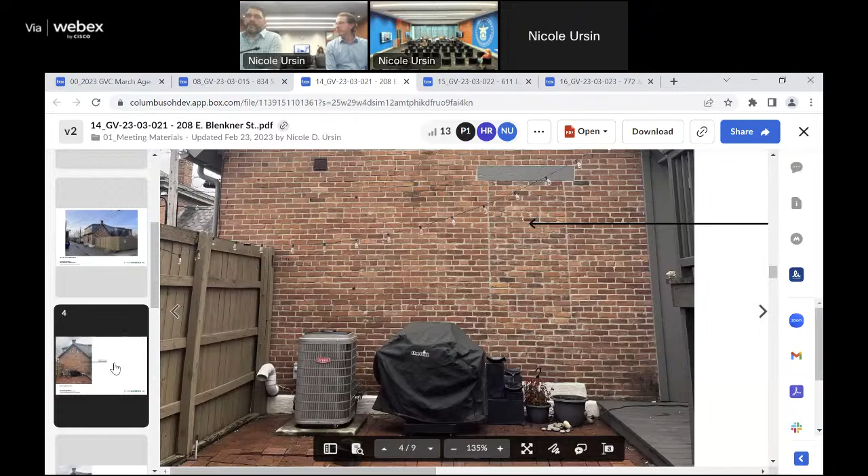So what Ned has actually mentioned is different than I initially recommended. He's saying do a full window of the original size and then detail the counter so that inside it turns down, and you end up with the same size window and same amount of glass. It's just a different detail. The concern with that is the depth from counter to sill, it's going to be about 12 inches.

If it's an operable double-hung window, you can actually open that, finish it by opening it, and open it to clean back there if you need it. And you have a backsplash across it. Yeah, I've seen people put plants in that area. Yeah, this is nothing new.

We got the gas meter there, kind of in the way now. So taking the stairs off won't improve the space for cars so much, but I have no problem with these. No, I don't either.

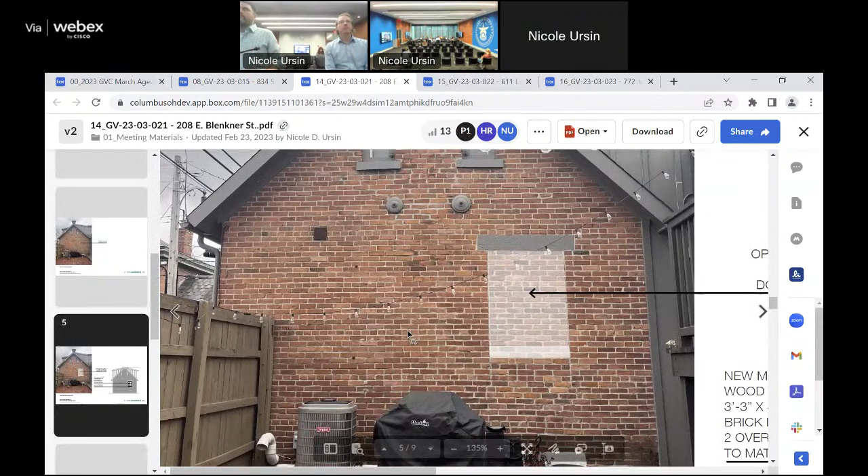Any other comments? Just in my memory, we've never allowed an existing window opening to be shortened like that. Would you like to amend your application? Yes, we're fine, we will accept making the window taller to fill the historical opening, the window itself taller.

Maintaining the original. Go look at the house on the corner of Macon and Beck.

You can walk down the alley and take a look, it's right there. I think you'll actually see something. If you treat it right, it can be pretty cool. Yeah, certainly, it's done well in that house.

So how many square feet is this house on the interior, do you know? It really is a small house, a tiny house. It's surprising with the addition above the garage. It's about 1,400 square feet.

Yikes, okay, more than I got. Whereas when I was in Columbus it was 900 square feet. I spent the summer in a 950 square foot house. I've been in much smaller, in New York. I have a friend who'd call this a mansion. On Sun Island I have 450.

The sleeping platform is above the front door. The ladder goes up. Do I have a motion on 208 East Blenkner?

Before we vote on this, just for clarification, would a sandstone sill be added where the original one and the ghost marks are, for the window? Yeah, I believe they're limestone on the house. We'll match what the house has. Let's look at it, I believe they're limestone. Yeah, match. Thank you.

So I'll move to approve item 14, GV-23-03-021, as amended by the applicant to include a window that matches the existing head and sill height, that will be a full glass window with a new sill to match the existing house.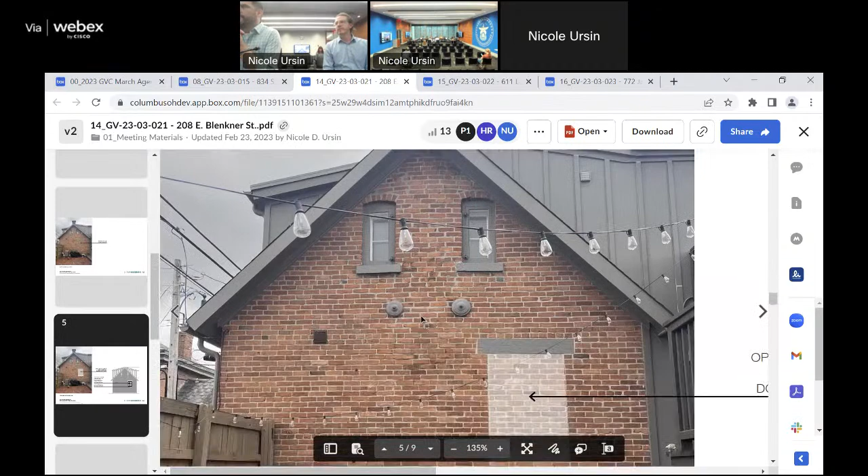Do I have a second? Correct, did I get that right? Yes, thank you. Second. All those in favor say aye. Aye. Opposed? Motion carries. Additionally, updated drawings will have to be submitted to staff for final approval.

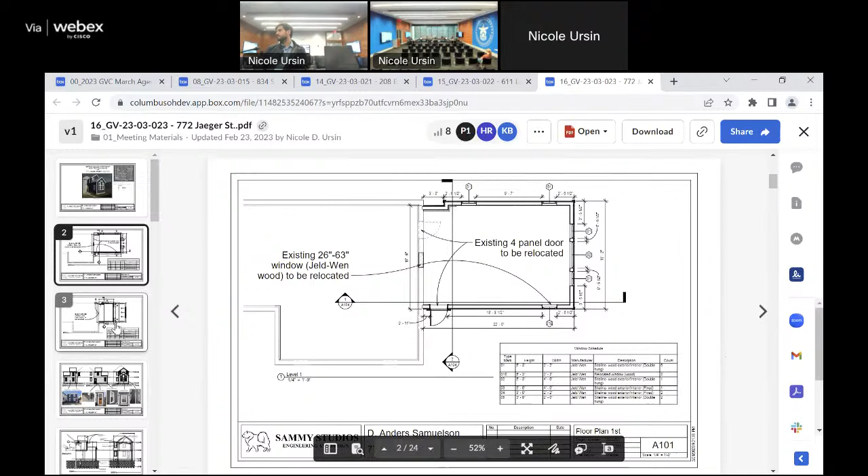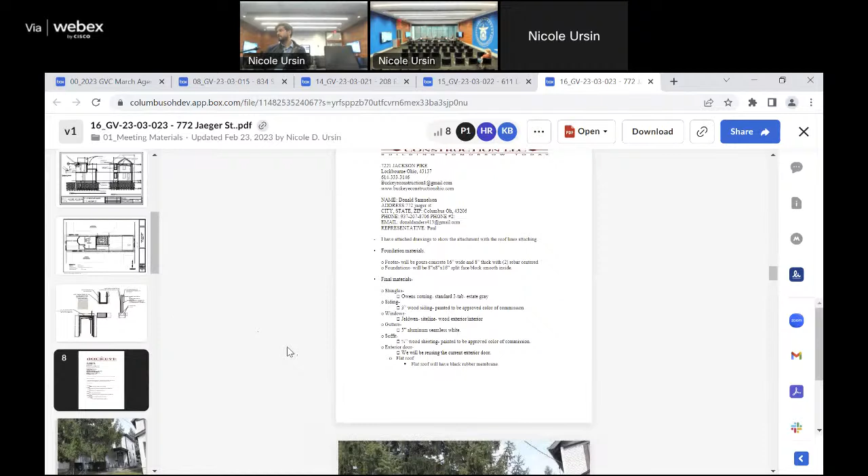The paint color is to be Sherwin-Williams SW6237 Dark Night. Shingles are to be Owens Corning standard 3-tab estate gray. Siding is to be 3-inch wood siding, painted, color to be approved. Windows are Jeld-Wen Siteline wood exterior interior. Gutters are 5-inch aluminum seamless white. Soffit is 1/4-inch wood sheeting, painted, paint color to be approved. Exterior door to reuse existing, and a flat roof will have a black rubber membrane.

Staff analysis, including summary of any previous review. The following is taken from the now approved February 1st, 2023 German Village Commission hearing minutes, commissioner comments. Commissioners recall that at the business meeting the hyphen was discussed. It appears the hyphen is the same as it was, just missing the gable roof between. Now the entire addition is a flush wall. Commissioners recommended that the hyphen be narrower than the addition. If the hyphen is narrow, the addition can be widened to be on the same plane as the existing house.

Commissioner mentioned that in other approved applications with proposed hyphen connectors, applicants proposed windows in the connector to make it look less solid. Commission asked if all of the windows are from the approved window list. White vinyl windows are shown on the drawings on page 3. This should be adjusted in the drawings if the windows are from the approved list.

Commissioners discussed the gutters. Typically gutters should try to match, but in the case of box gutters being on the main house, this may not be required for the new addition. Additionally, vinyl would not be allowed for soffits or any other placement. Commission does not typically approve vented soffits, they are not on this application. Material details would go to staff. Commissioners state the addition should be built to the standards they would expect without consideration to what is on the existing house.

The commission would like to receive the materials required for a building permit, site plan, and architectural drawings. At the March business meeting, the commission requested clarification on the relocation of the rear window and a new window opening on the north elevation, as well as information on the history of the structure and its addition.

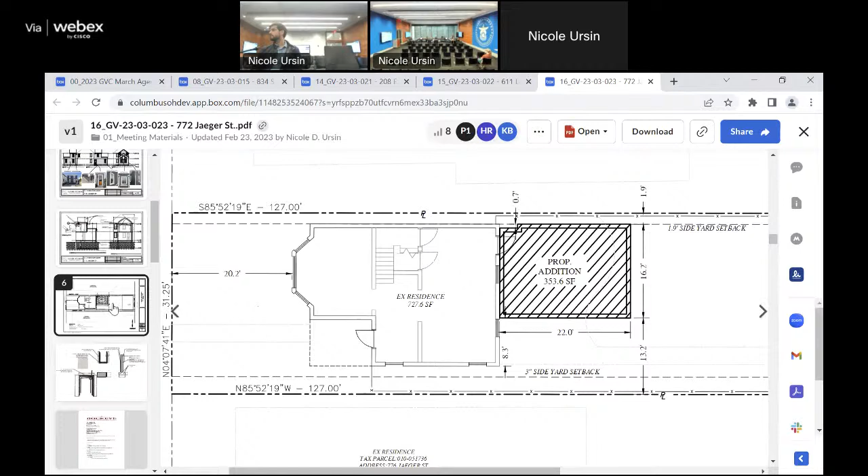Staff requested information on where the existing downspout will be relocated to. The applicant provided that the windows indicated as 01E are existing windows that have been relocated, with the existing window being relocated to the north wall of the existing home. The existing downspout will be directed to the flat rubber roof and will outlet to the gutter system on the north wall of the hyphen. Drawings have been provided that clarify these details.

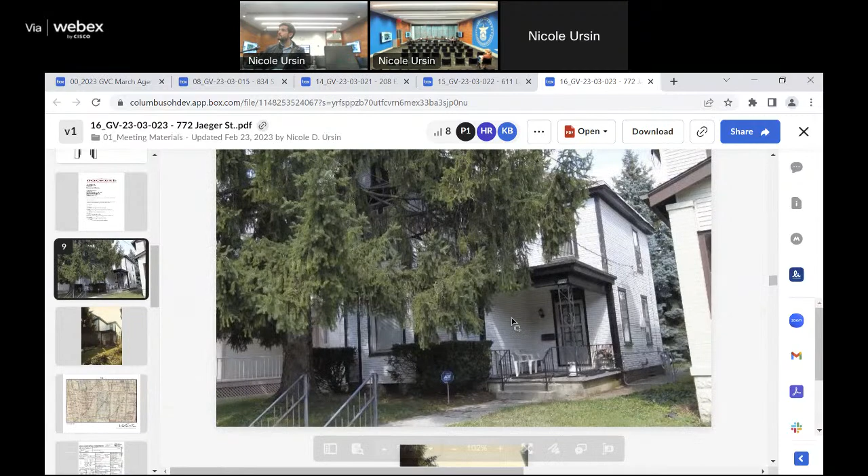On the history of the building, the applicant provided documentation from the German Village Society. A file from 1992 states the foundation of the bay window did not match the original block and was most likely replaced, and the home was most likely constructed between 1899 and 1910. Staff provided Sanborn maps showing the house existing in 1921 in its current configuration.

Oh, sorry. My brain, I'm sorry. Staff recommendation.

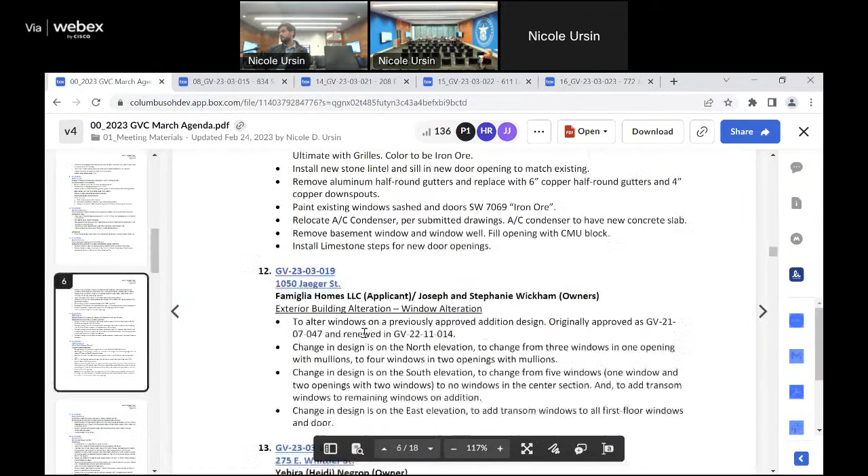Staff recommends approval with any and all clarifications to be submitted to HPO staff for review and approval prior to the issuance of certificate, with the following conditions: the new window on the primary structure be removed from the plan so that no new window openings are created for windows in the primary structure, and the applicant clarifies what the size of the opening will be created between the primary historic structure and the new addition, and what will happen to the existing historic exterior wall.

The basis for the staff recommendation is 3116.11 standards for alteration 1, 2, 9, 10, 11, and 3116.12 standards for new construction A, C, H, I, K, and N.

Anything to add or any comment? The one thing was that window on the north wall, that was added because that's actually a bedroom and that would be the only window in that room. So that was just for code compliance to make that a bedroom. We're open to removing it and revisiting it later if that's something you'd be interested in. The alternative I was leaning towards was to put in a smaller window that would be code compliant for a bedroom. I think 24-inch square is the smallest you're allowed for an egress window.

Is that room always a bedroom? That room's currently a bedroom, yeah. So when you look at it from the east elevation, that top right window there, that's the existing bedroom. Because the addition's going over that, it's losing that wall, its original window. It's losing its existing. Yeah, exactly.

Just losing my mind. I was looking at the previous application stuff for a second. I'm like, 25, 15, sorry.

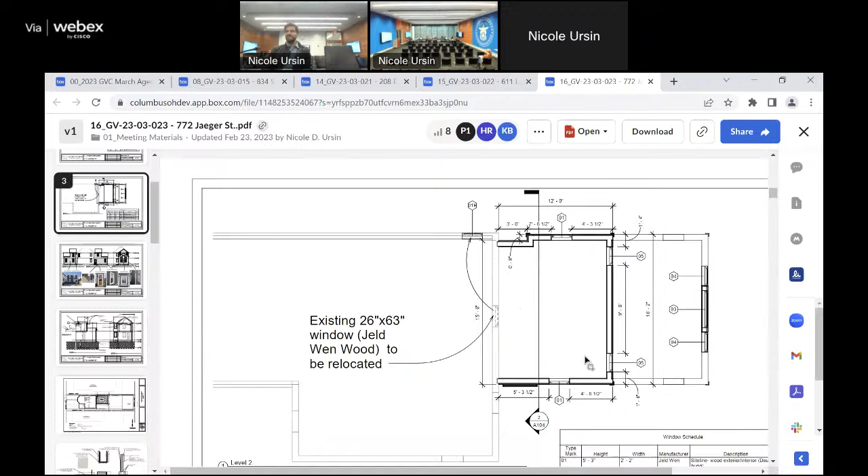And on the second, why is the eave depth different on either side of the second floor? And the 1'6" overhang, really large. South elevation.

Oh, over the flat roof? Yeah, I think that was just an effort to kind of cover that area up a little bit. If that's something you'd like us to revise, I'm not opposed to that. The reason that looks a little different is because that's the section, so it's kind of cutting into the roof a little further. I just think they should be the same depth on both sides. Okay.

Not good. Yeah. What was that? Not good. Got it. Thanks.

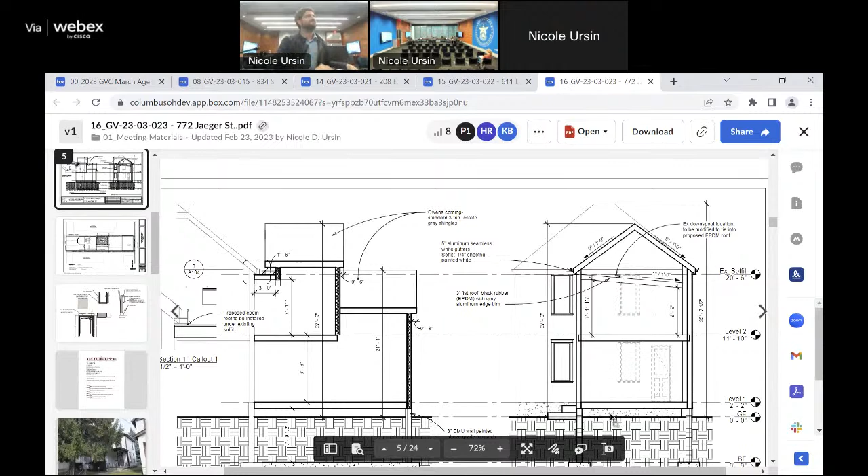I would recommend the applicant... it sounds like people are having a hard time with that, so it might be a good idea to separate this part of the application and handle it separately. I might recommend pulling in the hyphen so you expose the window.

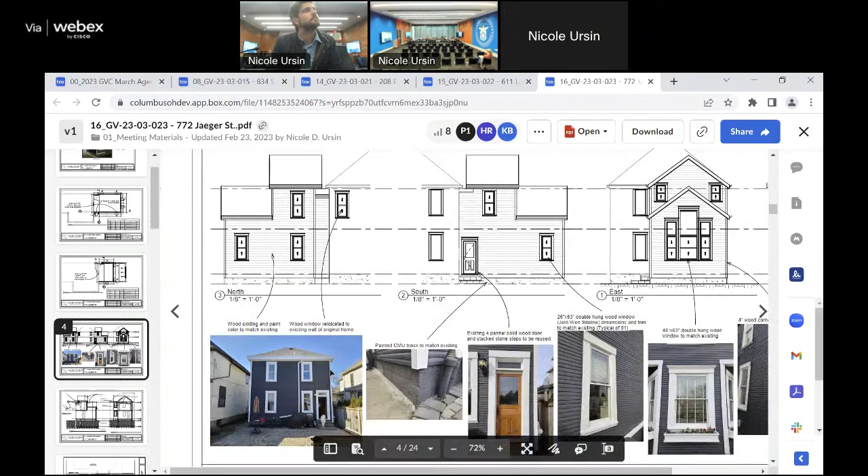Say that again, Drew. Just pull the hyphen in so the window is exposed. Or I could even live with putting a new window on that side so the hyphen doesn't have to be pulled back that far. Shift the window to the north on that side so it won't be visible.

You'd still get light. So you're saying narrow the connection. The only issue is the first floor, right where the existing door is, so you'd also be exposing that existing door. You could have a shed roof at the first floor level to pull the second floor back. Your roof slope is so steep, it's only 6'9" at the end, so pulling it back keeps the roof line a little higher.

I think that's the best path forward. I would prefer if we could come back later and have a chance to design that window specifically, if possible, and approve everything else if that's on the table. But that'll affect the design of the hyphen.

If we move forward with that as not a bedroom and just remove the window, it would be considered a large closet at this point. That'd be okay, and then we could come back and revisit it. So you're saying just take the window out of the application completely. Yep, if you'd like that, we will note that the application's been amended to remove it.

Any other comments or questions from the commissioner? If not, we have a motion. Just to clarify, the applicant has also amended to make the overhang match. Yep, on the same side. Yeah, we'll do that.

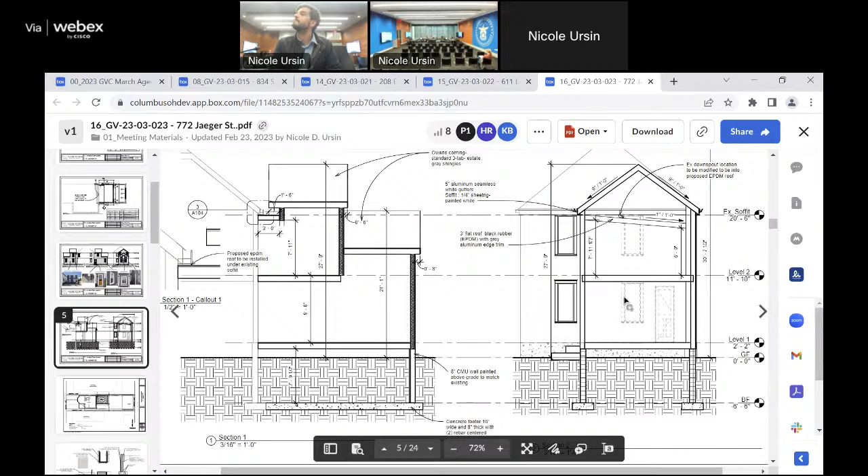Before we continue, I wanted to get the commissioner's feeling about opening that connection between the original structure and the new addition, connecting the door and the window. That was a concern from staff. It's frame construction, is it not? Yeah, masonry is one thing for me, frame is another.

It's now interior space, once it becomes interior space. You know me, I push back on ripping out masonry even if it is interior. We did have a previous application where the existing structure is exposed to the exterior and they weren't closing it, so I wanted to make sure we touched on that. Glad you brought it up. The interesting part is once it's enclosed, they can come back, but for the commission it hasn't been approved that way. Yeah, we're doing our preservation effort.

I will move to approve item 16, GV 23 03 023, as amended by the applicant to make the overhangs match and to remove the new window that had been proposed from the application. Do I have a second? All those in favor? Aye. All those opposed? Motion carries as amended.

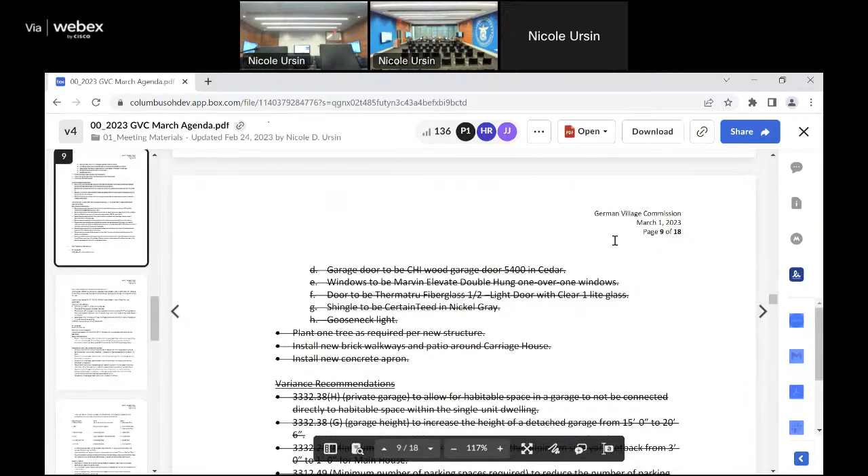So I once had a judge rule that I was not an expert in something I'd studied all my life. Was it because you didn't meet a technical requirement? Well, he had a rationale. Because I didn't have law practice experience in that area.

When we're ready. We have no new business. We have no old business. I will entertain a motion for adjournment. Move to adjourn. Second? All those in favor? Aye. The meeting is adjourned. Thank you.

In an hour and a half. Sorry. Boy, if I'd have known that, I wouldn't have swapped times with my colleague.